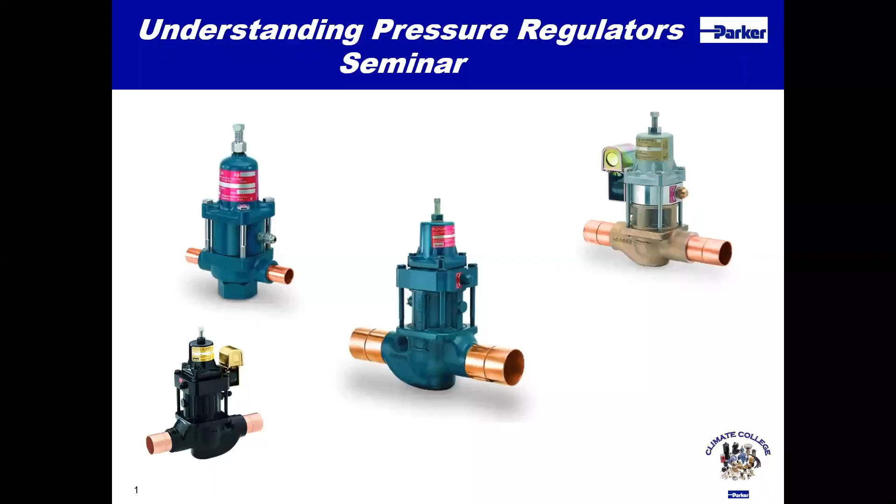Okay, alright, so just want to start off by thanking everybody for joining. My name is Eric McClure. I'm one of the regional sales managers for the Sporlan division of Parker. Just a little background about me.

Before I came on to Parker, I used to be a design engineer. I was designing chillers for several years out of college. Then about 4 years into that, I ended up joining the Sporlan division of Parker back in 2007 as a sales engineer. Then in 2010, I took over the Chicago sales office and did that for about 7 years. Then in 2017, I jumped over from the Sporlan division to the refrigerating specialties division and oversaw their sales force for both the Flo-Con and the industrial side of the business as well.

And then in the beginning of 2019, I believe it was, we decided to merge the Sporlan division and the RS division into one big division. Kind of kept the two separate still, and we still do — we still have two separate sales forces, two separate customer service departments, two separate plants as well. So what I oversee now is the industrial side of the business and the Flo-Con side of the business, and I also oversee the Sporlan traditional side of the business for the northern half of the US.

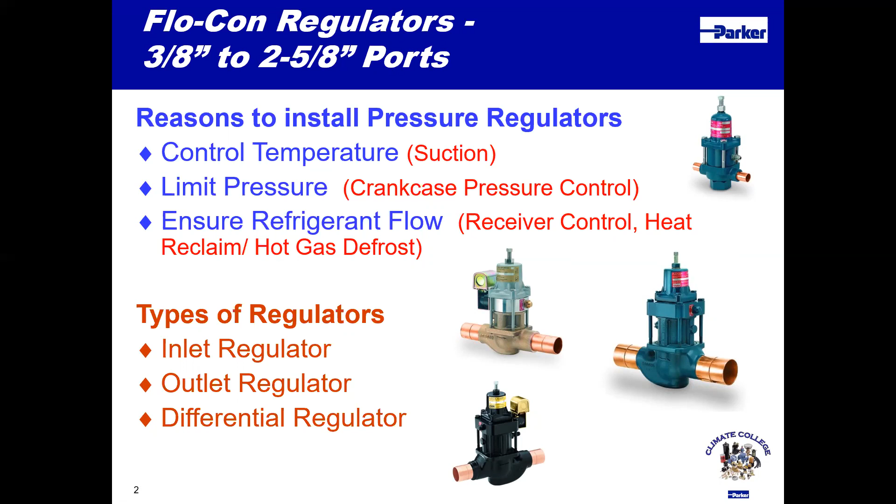So here are the typical applications covered by Flo-Con. You've got your crankcase pressure regulating valves. I'll go through the nomenclature in this presentation, as well as show you where it's at in the catalog. We basically use similar nomenclature to what Sporlan uses.

We use an O for an outlet pressure regulator, and an E for an external equalizer. Sport valves—the S in Sport stands for the solenoid shutoff valve, and ORT stands for open on rise of inlet. So it uses the same nomenclature as Sporlan. Sporlan has the SORD valves, the ORD valves, and the CROT valves—very similar to Flo-Con.

At one point the RS side competed against Sporlan until Parker bought Sporlan, and then we had two similar product lines. The Flo-Con product line has a lot larger capacities than the Sporlan product line, but we still maintain both product lines.

Going down the list here, you've got crankcase pressure regulating valves, which are your A8 series of valves, and they're outlet pressure regulating valves. You also have your discharge regulating valves, which are the differential valves—the D stands for differential, the O stands for outlet regulator. And then we also have our smaller series valves, which are the A9 valves.

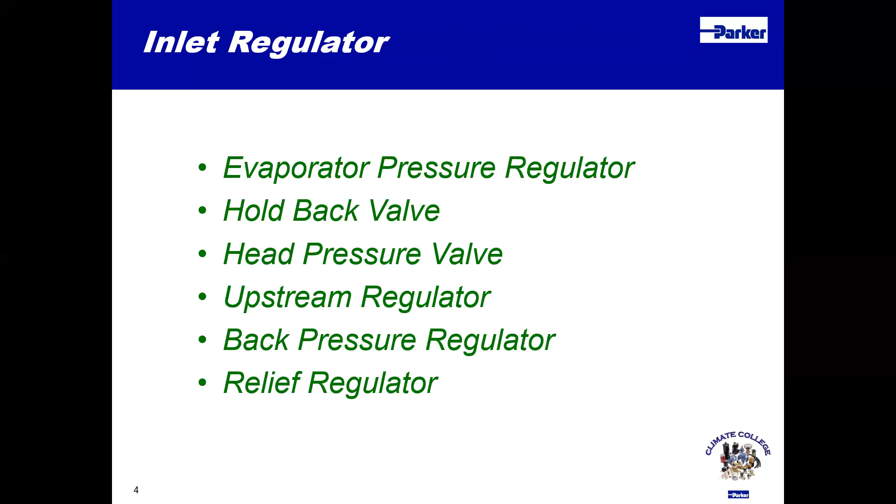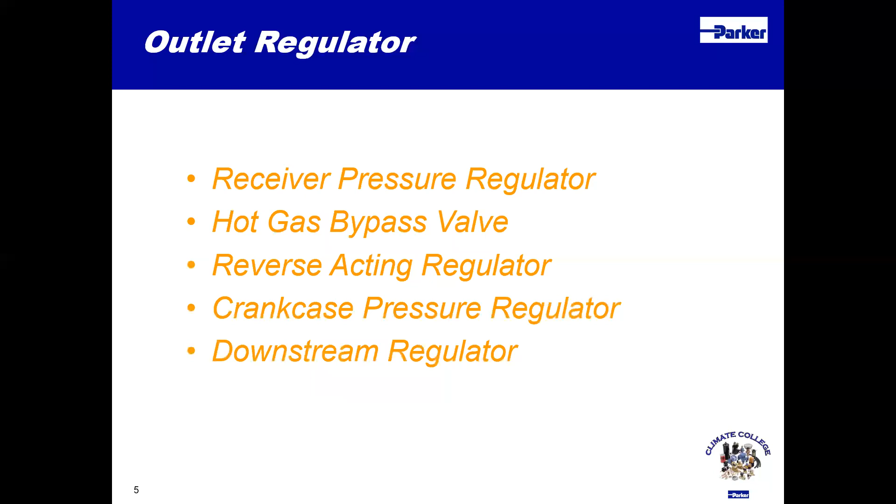Jumping over to the outlet side of valve types, you've got receiver pressurization regulators, hot gas bypass regulators, reverse acting regulators, crankcase pressure regulating valves, and downstream regulators. All these are just the same terminology for a valve that looks at downstream pressure and controls based on that.

Then you've got your differential regulators—your discharge regulator and your receiver pressurization regulator. They could be looking at the difference between your condenser inlet pressure and the pressure going into the receiver and controlling based on that, kind of like the ORD valves from Sporlan. Those are differential regulators, or the LDR valves, also from Sporlan, which are differential regulating valves as well.

All right, so jumping into this, first we're going to go over the sport type valves.

So like I said, you've got the Sports and the Sport 2s, and the S in parentheses stands for whether or not the valve has a solenoid shutoff coil. They can shut the valve off whenever it's energized. So you can get the valves either with or without the suction shutoff feature.

Like I said before, the Sport 2 valves are aluminum bronze bodied valves. They are more corrosion resistant than the standard sport valves that have a painted body. These aluminum bronze Sport 2 valves have an aluminum bronze body and an aluminum bronze cartridge. It's also got a stainless steel piston and parabolic plug. The bonnet assembly is made of aluminum. Pretty much everything's corrosion resistant.

So that's the advantage, that's why a lot of people use these, and that's why we offer these for the sport valves - because they're in the suction line where there's a lot of condensation. So it prevents corrosion in the suction line valves.

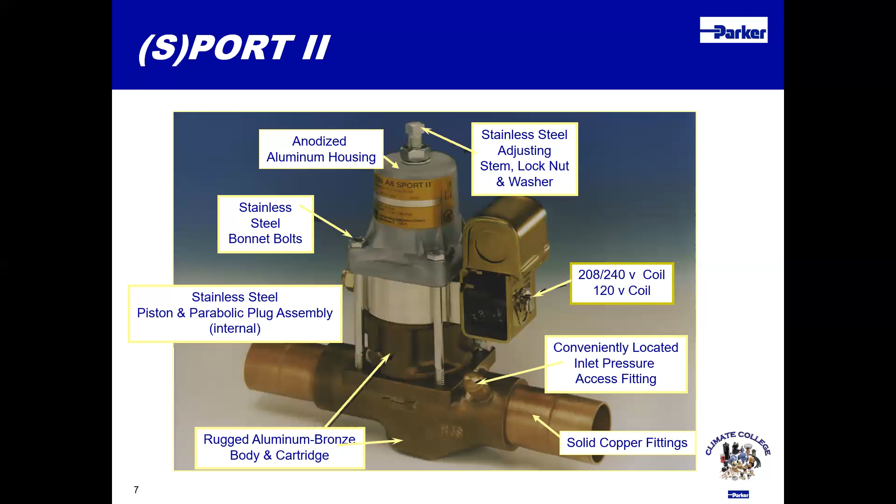So that's the Sport 2s, and then the sport valves are the ductile iron bodies. They're made of a ductile iron. The body and the cartridge are both made of ductile iron.

It's painted. One thing I do want to update you guys on: we're working on a project to bring in a new paint line into our Mauston, Wisconsin facility. We're looking at doing a higher end powder coat paint for all of our valves, not just Flo-Con valves, but also the RS industrial valves. One of the complaints we've heard in the past, rightfully so, is our paint, especially in suction line applications or in industrial applications on top of rooftops, doesn't hold up as well as plating the valves. So we offer plated valves on the industrial side, but we're also working on improving our paint line and bringing an entire new paint line into the Mauston facility. And the powder coat paint we're using is a similar type of powder coat paint that's used on compressors.

And so we've tested this powder coat paint well above 500-hour salt spray. So it actually competes and has exceeded the valves that are out there that are plated. So that's just an update on one of the things we're working on at Mauston - upgrading our paint line. But back to the presentation.

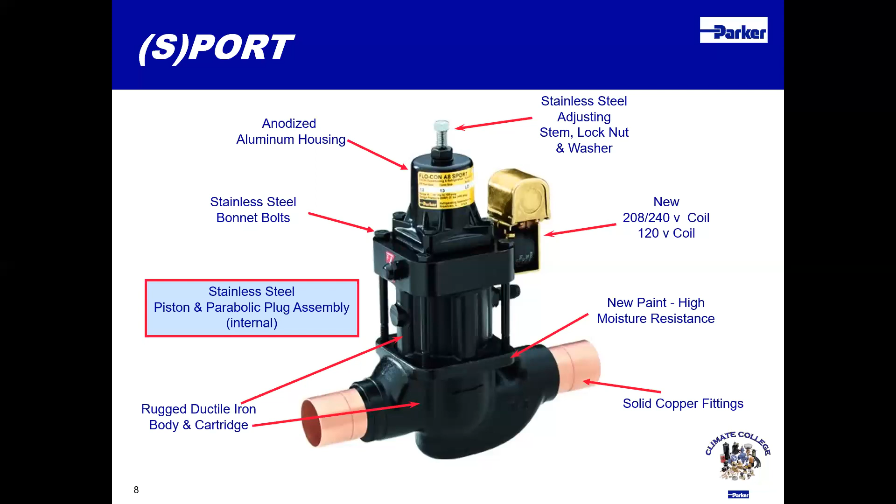And here's kind of what shows it right here, actually. So the Sport 2 is 3/8 up through 1 3/8 port size, and the sport valves are 3/8 through 2 5/8 port. So there's 4 main components. You guys are all familiar with the Q valves and the BQ valves from Sporlan, where you can mix and match and build your own valves. So you've got your body, your capacity cartridge, and your power element.

So on the sport valves, they're very similar. We've actually toyed around with the idea in the past of building a Flo-Con bench, if you will, where people could stock the bodies, the capacity cartridges, the adapter assemblies, and bonnet kits, and kind of build up their own valves. I know some wholesalers do stock all the different components and they'll mix and match - they'll take a capacity cartridge off of one valve and put it on another valve in order to make the valve that the customer needs. That's what they do now. But it's a very interchangeable valve.

You've got 4 different components. You've got the body, and on the sport valves there's 2 different size bodies. On the A8 valves, there's 3 different body sizes. And that's where you have your inlet connection and your outlet connection.

And based on the port size, that's where you get into the different body sizes. And then the capacity cartridge, you're able to swap those things in and out. So say you got a Sport 2 5/8 valve on the shelf, and the customer comes in and needs a 7/8. You could always take a 7/8 capacity cartridge and swap it out with the 5/8 that's on the valve now, and make that 5/8 port size valve into a 7/8 port size valve.

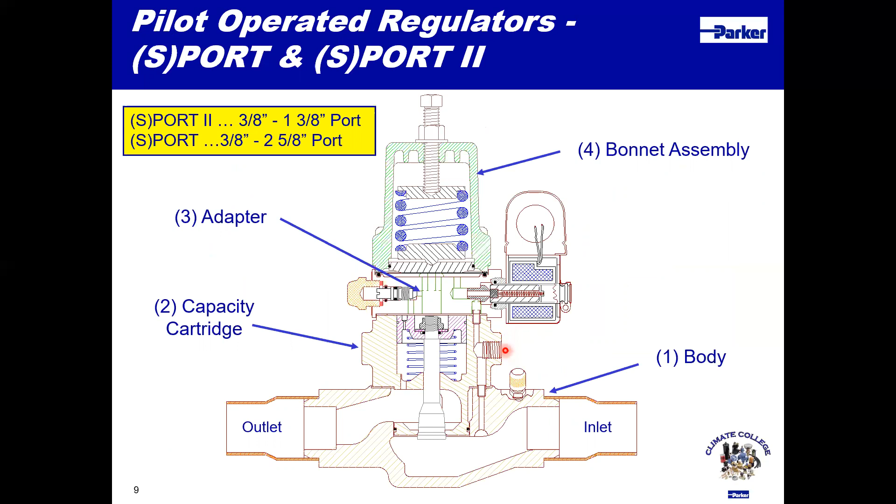Let me jump back here. It used to be right here. What was happening was contractors were burning their hands on the coil when they tried to connect to the valve. So I don't know how many years ago we moved it, but we moved it down to here. So you might come across an old valve out in the field that has the access fitting up here, but it's since been moved down here.

So that's the first component. The second component is the capacity cartridge. Like I said, it determines the capacity of the valve. It can either come in aluminum bronze or ductile iron body, depending if it's a SPORT or a SPORT II.

You'll start seeing all the gaskets involved in this valve. You've got a gasket on the bottom side of the capacity cartridge, and a gasket on the top side of the capacity cartridge as well. The alignment pin would slip into this passageway right here from the body, and then there's another alignment pin up here that aligns with the adapter assembly.

This is what we call the parabolic plug. It's stainless steel, and this whole piston moves up and down based on the flow going through the valve. As this piston moves downward, it opens up the passageway and refrigerant flows up through the port around the parabolic plug to the outlet. So that's kind of how the valve controls.

There's a slide later on that touches on it, but there's a lock nut right here that you need to make sure of. There's directions in some of our literature on how to set this valve, but if you over-tighten the lock nut, the piston doesn't move as freely as it should.

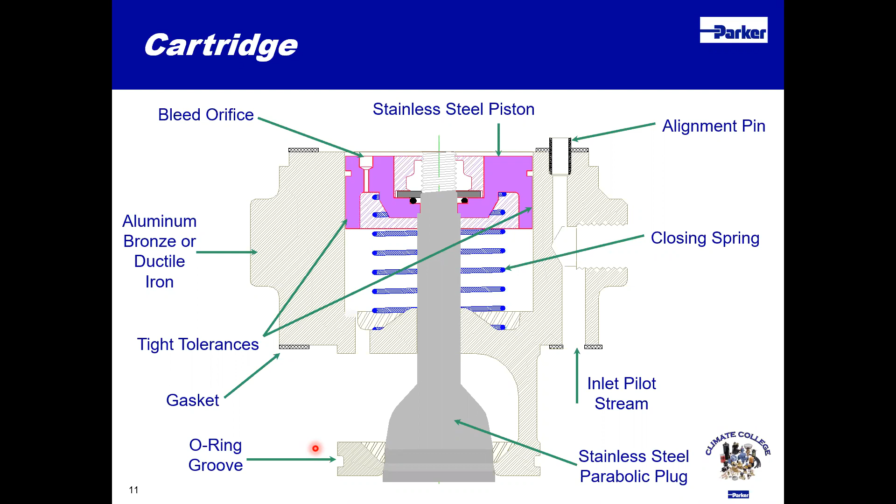One of the things, I don't know if this would be beneficial, Jeff, I don't know if I've already sent this to you, but I created, maybe 2 years ago, a file and I can update it as well. I ran a report for all of our rack OEMs, what they've purchased as far as Flo-Con valves over the past 3 years, I think it was. And I basically ranked them based on most quantity down to least quantity so that you're able to take a look at that and see what the OEMs are using most, and base purchases off of that.

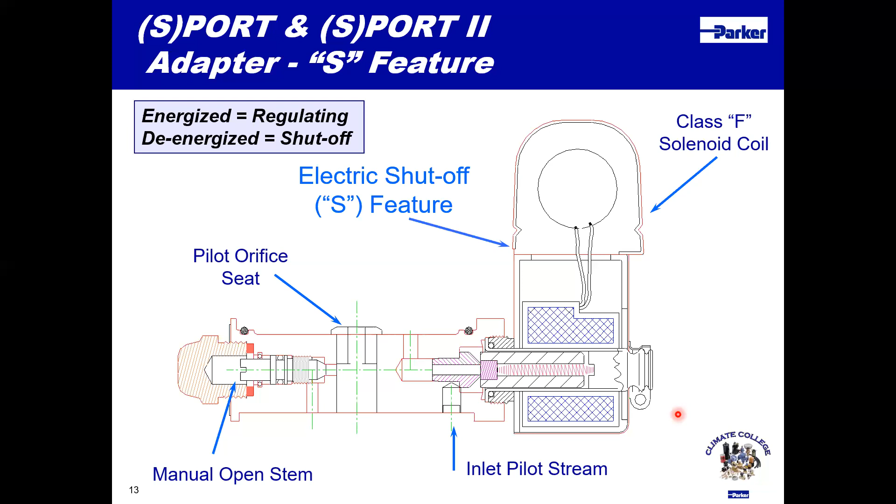No, we don't have it, and yes, I can forward that on to purchasing. That would be a help. Okay, yeah, I was thinking about that because you don't see too many port valves being used in applications. For the most part, we sell a sport valve variation.

So in order to go into wide open mode, you'd have to have both coils energized. Again, that's typically used if you have a dual temperature case. You're controlling one temperature to say 20 degrees Fahrenheit, and then, say around Thanksgiving, you want to convert that case to a turkey freezer. You then energize the bypass coil, pull the system down to rack pressure, and then run at a lower temperature.

Here's another breakdown of the operation of those two coils. On the shutoff coil, if you're energized, you're regulating the flow of refrigerant. If you're de-energized, you have the valve completely shut off and it's not regulating refrigerant. And then on the bypass feature, if your coil is energized, you're wide open. And if your coil is de-energized, you're in the regulating feature.

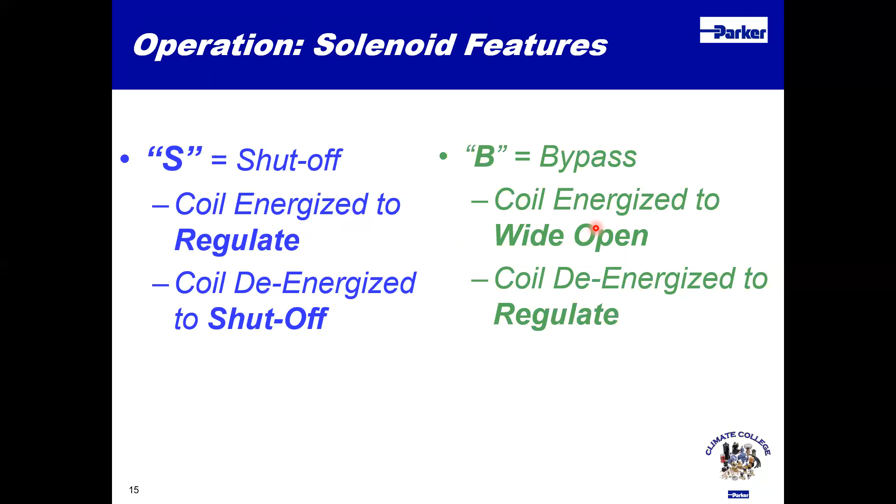The final part of the 4 parts that go into any sport valve or A8 valve is the bonnet assembly, and this is basically where you adjust the setting of the valve. On the sport valves, because they're on the low side of the system, you only have 1 spring inside of this bonnet assembly. Whereas on the A8 valves for the high side of the system, you'll see 2 springs in here because it's controlling a higher pressure.

The bonnet assembly is made of aluminum. It's got a stainless steel adjusting stem, a lock nut, and there's an O-ring seal right here. The diaphragm that sits on top of the adapter assembly is right here in red. And then you've got what I call a pin carrier, but really it's the bottom part, your spring carrier, with your O-ring seal around here. In this application, no refrigerant should be up in this bonnet assembly, whereas when I show you the differential valves, they'll have refrigerant up in this bonnet assembly. So this O-ring seals any refrigerant off from getting up into here.

Obviously as you adjust this adjustment stem downward, you increase the pressure. And in our catalog, it does show, for how many turns, how much pressure differential, how much pressure change you get based on each turn.

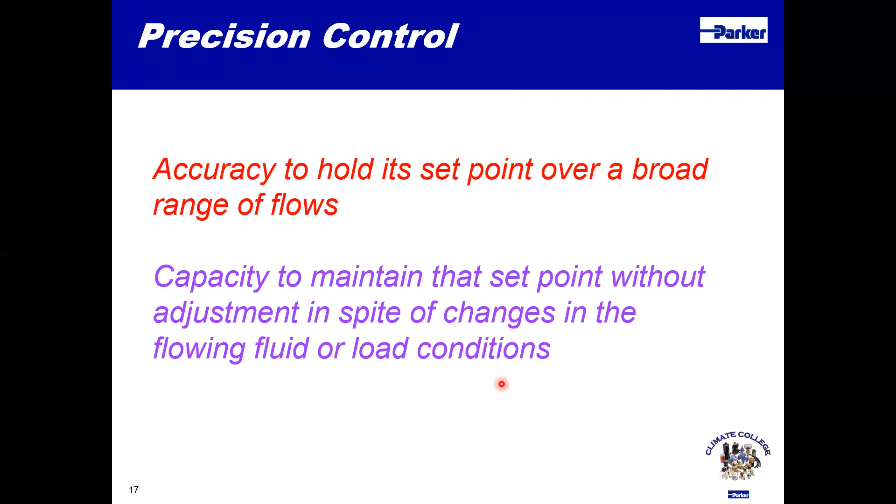Yeah, so basically that's the sport valves. And like I said, you use the adapter assemblies, using the adjustment stem on top of the bonnet assembly, to change the pressure setting of the valve.

And then this just goes into some information as far as different types of pistons and the parabolic plugs, just all the features of the sport valve and why it's able to control such precise pressures on the suction line.

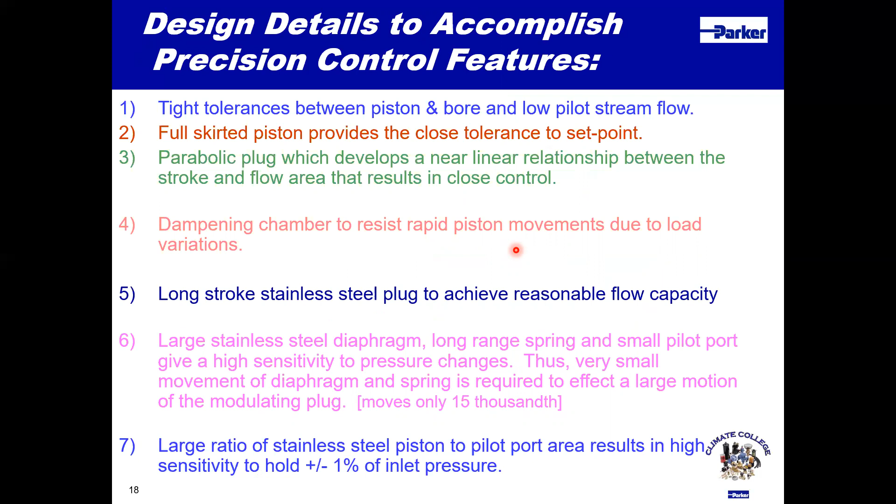We're actually looking to move our CO2 lab to Broadview as well. We're going to pretty much make the Broadview facility the natural refrigerants location. Then down at Sporlan headquarters, that's where we do all of our testing on the other refrigerants, the HFCs. So we've done a lot of testing on the Flo-Con valves down at Sporlan headquarters too. And up in Wisconsin, in Mauston, is where our production facility is at. Mauston's about an hour and a half north of Madison, Wisconsin, and about 2.5 hours outside of Milwaukee. We'll have to get you guys down to the facility at some point in the future once we're allowed to travel again.

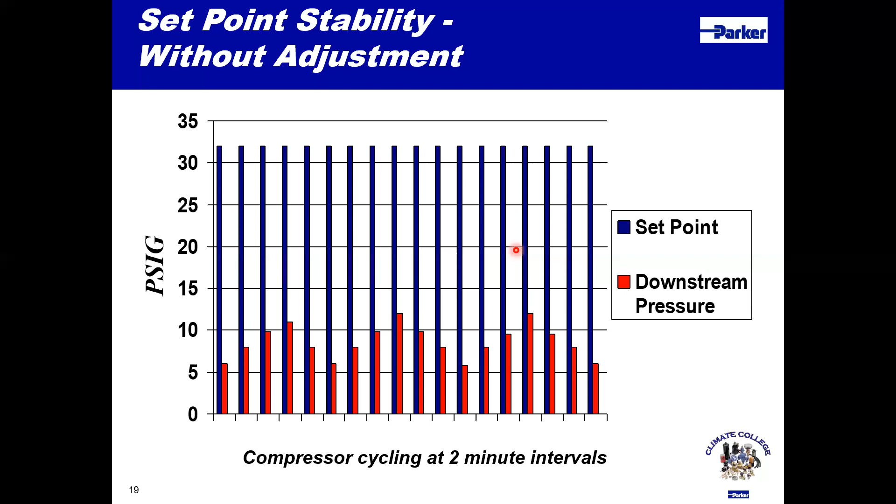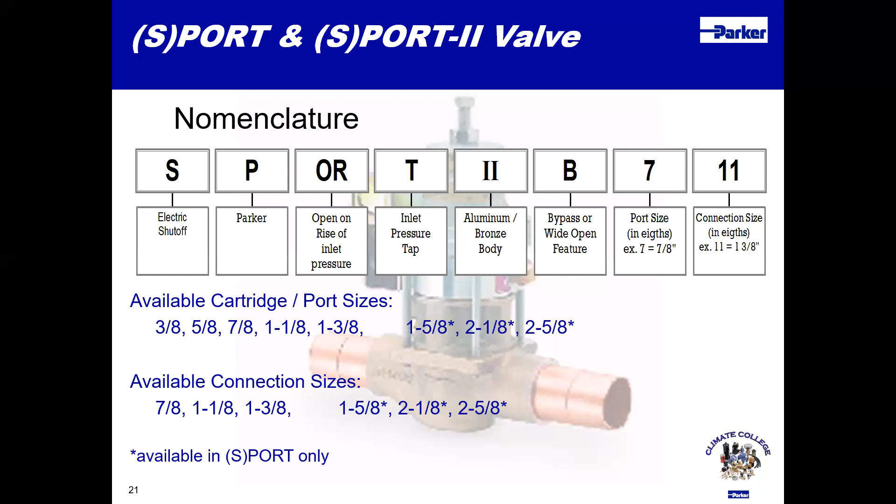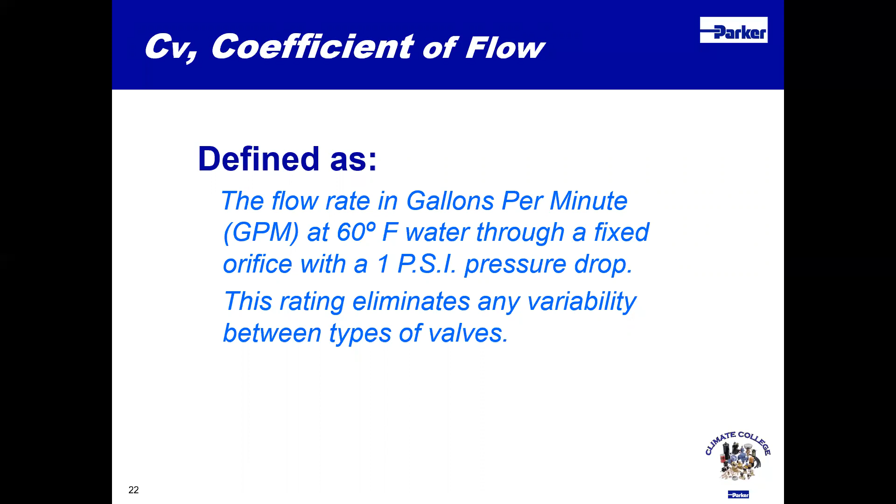Let's go to the next slide. So CVs, I don't have the CVs listed on this presentation, but I can send you the CV list of all the valves, not just Flo-Con, but also the RS side of the product line. We have a wide range of CVs for all these different valves. We actually have a table that shows the CVs of the sport valves and how they compare to Sporlan valves and CDS valves, so you can compare them to the Sporlan mechanical valves as well as the Sporlan electronic EPR valves.

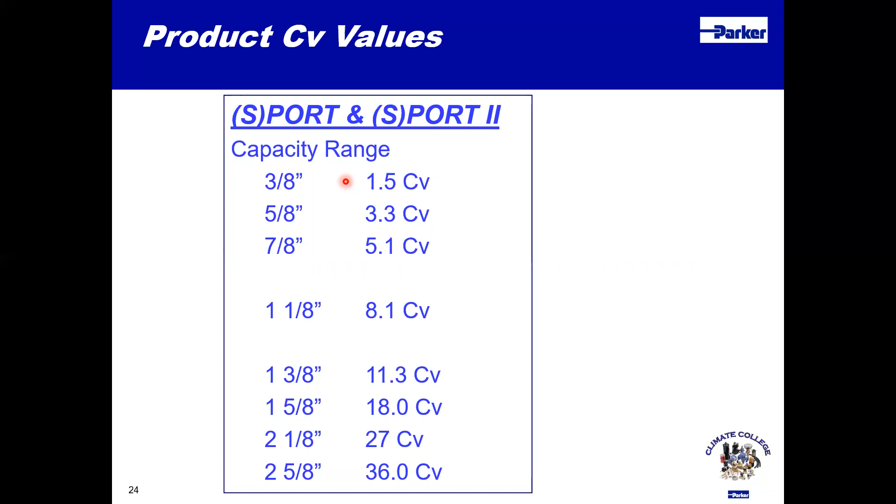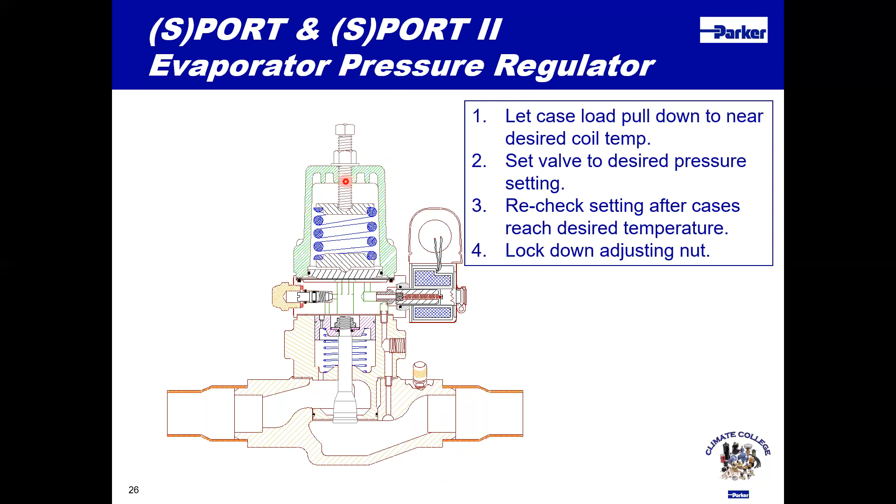As far as setting the valves, obviously let the caseload pull down to the desired coil temperature, and then set the valve to the desired pressure setting. I'll send you guys a list of how much pressure changes by each turn. It varies - the sport valves have a certain amount of pressure change per turn, and as you get to the high side valves, the change in pressure setting is a lot greater since there's two springs inside there. I can send that to you guys as well. Once you have the desired setting set, make sure you lock down the adjusting nut with the lock nut.

All right, so I went over the EPR valves. Any questions on the sports or the sport 2s? You guys are a quiet bunch.

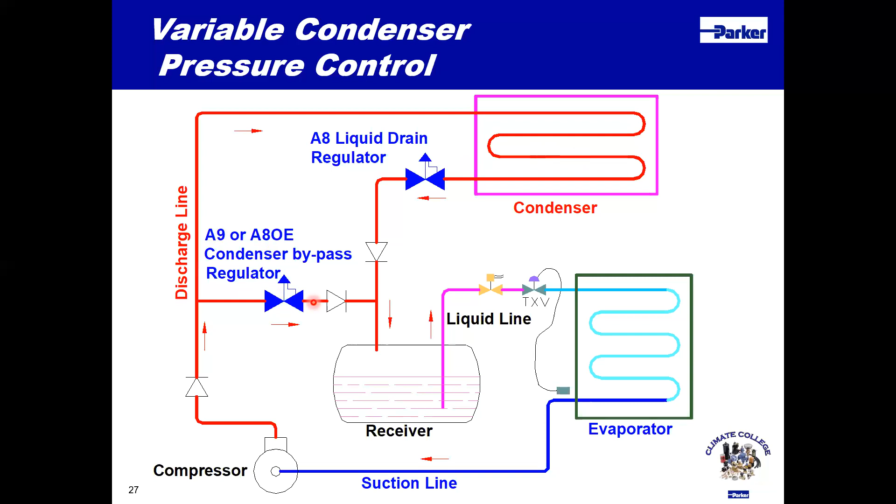So very similar to the sport valves, the sport valves are based off the A8 platform as well. Really, the only main differences are the A8 valves have 3 different body sizes instead of 2 for sports. The A8s are not offered in the aluminum bronze configuration because they're not in the suction line, so they don't sweat as much. And then also they have higher spring range than the sport valves do. But again, they're very similar - they consist of 4 different components: the body, the capacity cartridge, the adapter assembly, and the bonnet assembly.

Eric, if I may interject there, also for the hot gas bypass, the A8OE is used in floating head pressure because of the differential function as well, guys. Yep, and we're seeing more differential valves being sold over the years recently too.

Again, just setting the A8 inlet - so the A8 has 3 different body sizes, like I said, and I'll get into this in a second. There's the A8A, which is the smallest, the A8-1, which is the middle size valve, and the A8-2, which is the largest valve. So you always want to set your liquid holdback or your condenser holdback valve first, and then after that, make sure you set your condenser bypass or your receiver pressurization valve after you set your condenser holdback valve.

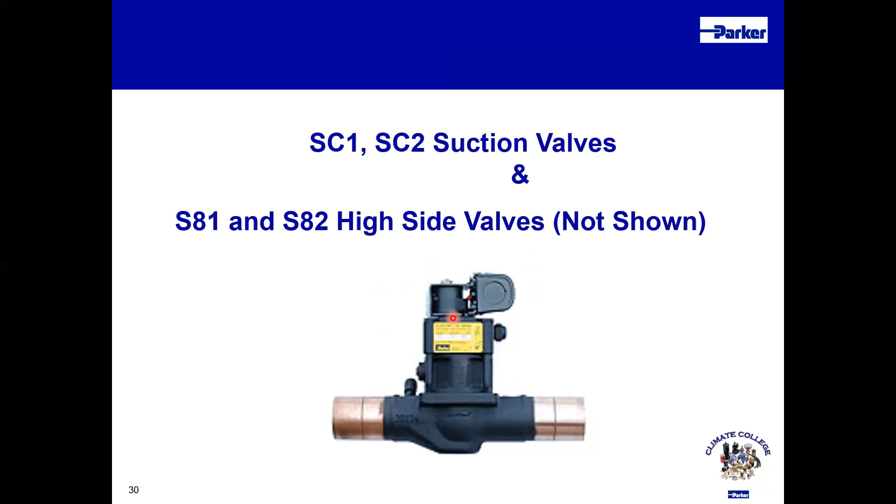Real quick, just going through the features of the SCs and the S8s. The SCs obviously are designed for the suction side applications. MOPD is 300 PSID. Because it's used for the suction side, it's offered in both ductile iron bodies and aluminum bronze, Class F coils, and then it's the same solenoid coil operator as all the Flo-Con products. And then the S8, the high side solenoid valve, is designed for high side applications. It's not available in aluminum bronze because it's used on high side, and it's available for the ductile iron bodies, and these come with the Class H coils rated for the higher temperatures.

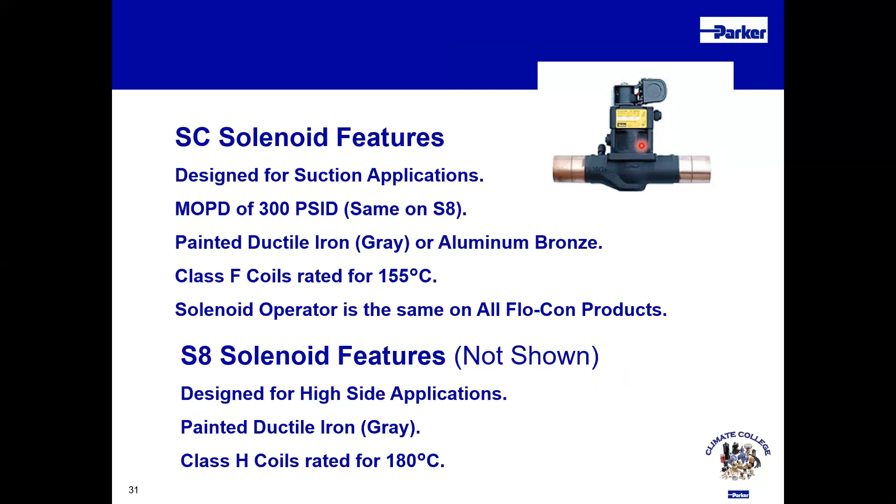Some Flo-Con do's and don'ts. Never use SC or S8 capacity cartridges in a sport valve. The capacity cartridges look similar, but they aren't exactly the same, so make sure you don't treat them as interchangeable.

Again, never use sport coils on the A8 discharge valves, or Class F coils on the high side valves. Never use a sport valve, which is your EPR valve, for high side control. It's not rated for it.

The pressure range of a sport valve is 0 to 120 pounds, whereas the high side goes up to 400 pounds of control. So never use a sport valve on the high side of the system.

And then never use an O-ring on the diaphragm follower of an A8L, which I'll show you why. On the A8Ls, that's where the refrigerant bleeds up into the actual bonnet assembly of the valve, so you don't use an O-ring on that application.

Quickly on the A9s: we have the A8 valves that are outlet regulating valves. The A8 AOE valve is an outlet regulating valve, typically for hot gas applications or smaller systems for receiver pressurization. You don't need a big A8 valve for the bypass feature, so we offer the A9 outlet regulating hot gas valve. It's a smaller bodied valve that's only an outlet regulating valve, so it only has 3 components.

It has the body and the capacity cartridge. It does not have an adapter assembly because it only does one function - outlet regulating. Then you've got your bonnet assembly right here as well. It has a lot smaller capacity, so if you compare an A8A or A9 with the 7/8 port size, the A9 7/8 port size has less capacity than an A8 7/8 port size.

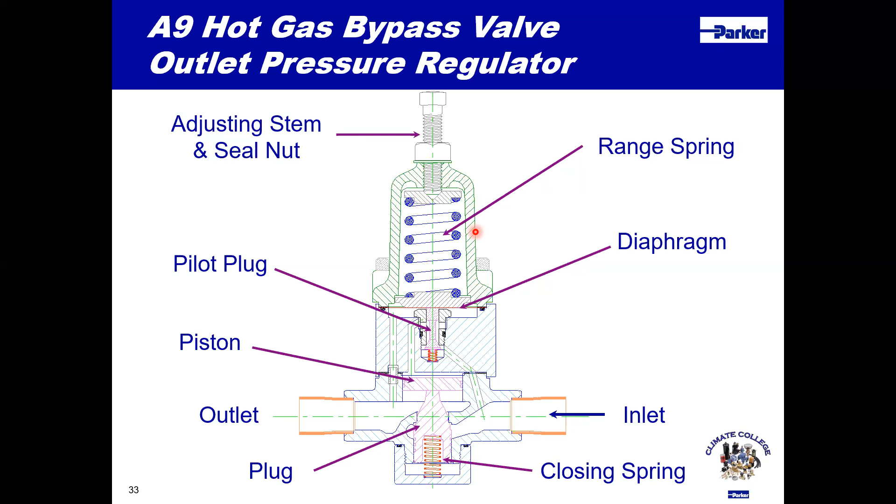Again, whenever you're doing high side head pressure controls, first you set the A8 condenser holdback valve that's in the liquid line, and after you do so, you set the A9 valve for receiver pressurization.

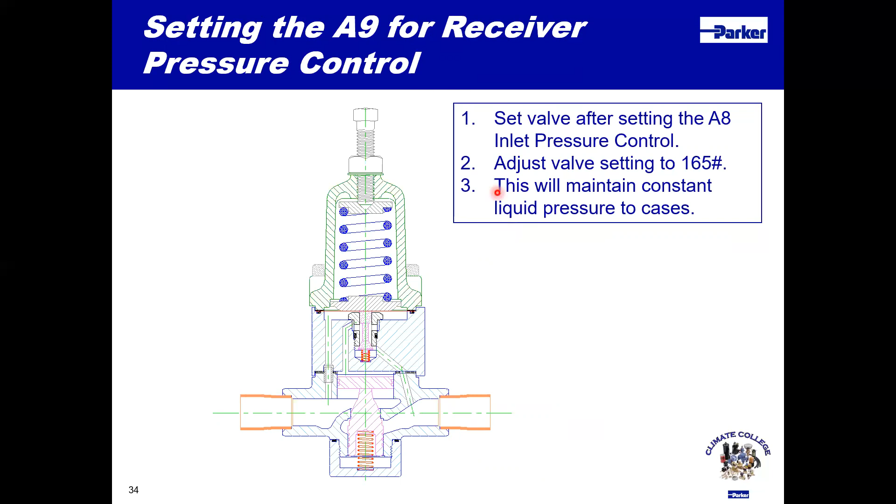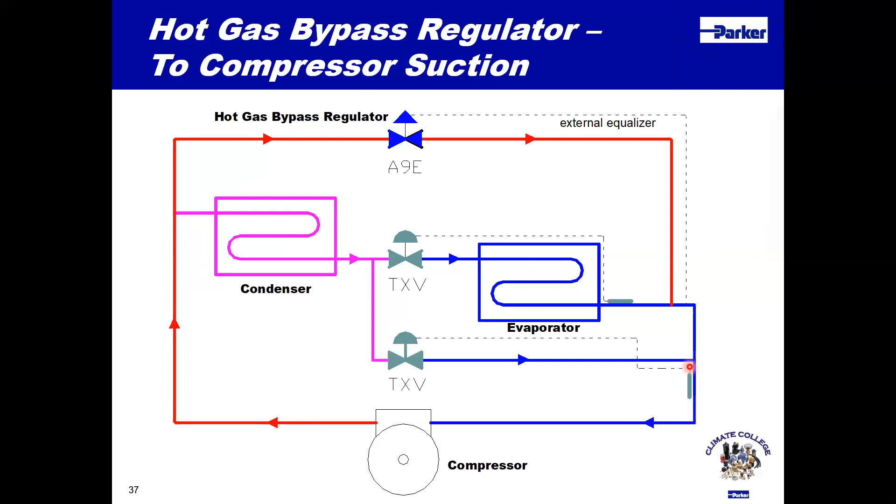The L stands for differential, and then the B stands for the bypass feature, so wide open feature.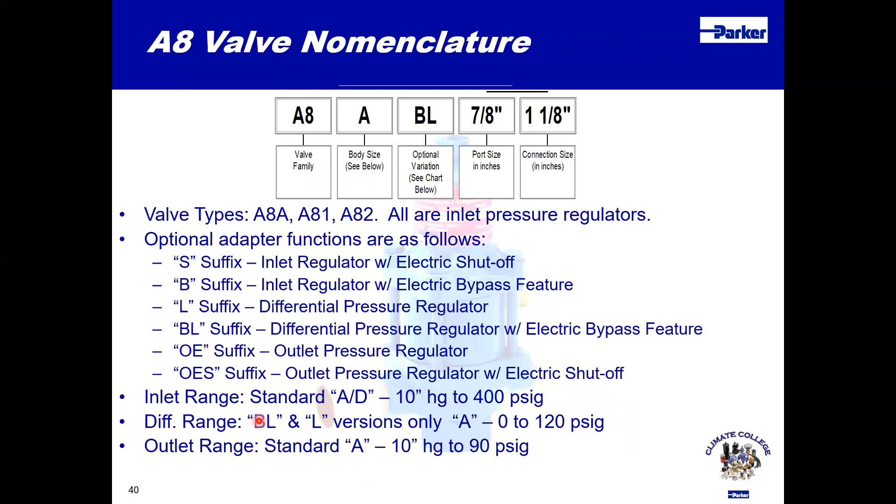If you remember, the sport valve only had one spring in here. Well, the A8 high side valve has 2 springs. So when you first adjust this thing down, the inner spring is actually stiffer than the outer spring. So when you first start adjusting down, you first engage the outer spring, and that outer spring is the same spring that's used in the sport valves. And so you have a 20 pound change per turn initially whenever you first engage that outer spring. And then once you engage the inner spring, skip back to this slide here.

So one turn is 20 pounds on those A8 valves until you get to 90 pounds. Once you get to 90 pounds, you then engage that inner spring and you go from one turn being 20 pounds to one turn being 70 pounds, and that applies from 90 pounds up to 400 pound adjustment. That's both for the A8 inlet regulating valves and the outlet regulating valves as well. Again, the differential valves use the same larger diameter spring that the sport valves use, which is the same outer spring as the A8 valves, so those have 20-pound adjustment per turn.

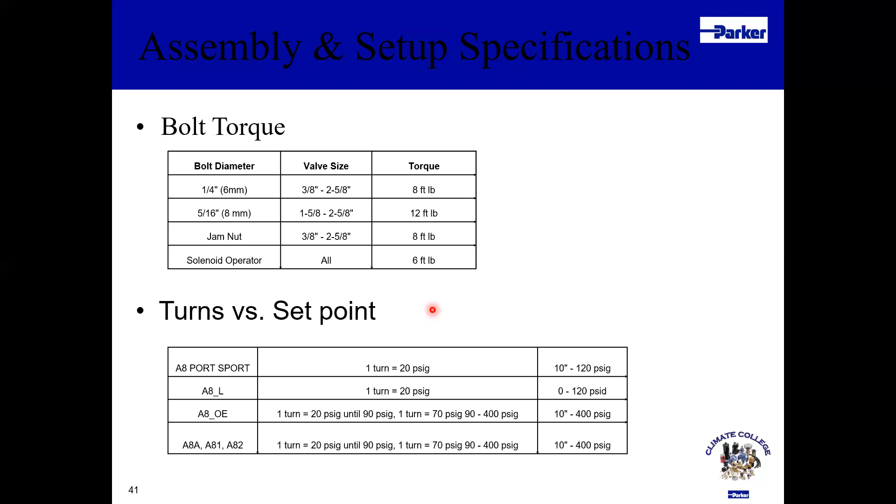Any questions on this slide at all? Nope.

Here's one thing. Typically whenever I used to do this training on the wholesale side in the Chicago area, we'd do some hands-on training, and we could even do this in the future as well. We would do hands-on training with contractors where at the end of the presentation we'd have 6 or 8 different sport valves or A8 valves, and we'd change things on them to make them not work properly, then put them in a jig and actually test them. One of the things is if you have the jam nut too tight, the parabolic plug and the plunger will not move up and down freely.

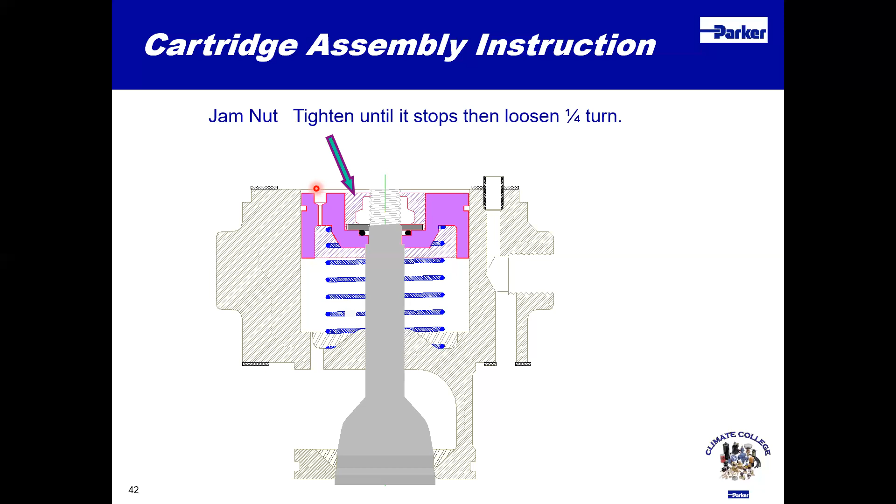So what you need to do with this jam nut on this parabolic plug on the cartridge assembly is tighten it until it stops and then back it off a quarter turn. So if you ever experience a valve that's sticking, that could be the cause of it - this is the jam nut being too tight. Let's see here, this is just a product - this is an old product bulletin update.

This probably you won't come across too much anymore. I think this came out maybe 10 years ago on the larger differential valves - the ones that utilize the A82 bodies, which is the 1 5/8 port, the 2 1/8 port, and the 2 5/8 port. Because of the side loading on the cartridge assemblies, back in the day we were seeing accelerated wear on the cartridge assembly. So we added, maybe 10 years ago or more, these wear rings to the cartridge assembly. If you come across an old valve in the field, you might see that the capacity cartridge does not have those wear rings, but since then we've added these wear rings to the valves.

So that was 2006, 2007, Eric. Okay, all right, you got a lot more history than I do on this product line. Like I said, I came over to the RS side, over to the dark side, in 2017.

Let's see here, this is just basically a supermarket drawing. We had these on the Sporlan side as well, showing the Sporlan valves. And then this is a supermarket drawing for the RS side, showing the port valves, the sport valves, the differential valves right here, high side regulating valves.

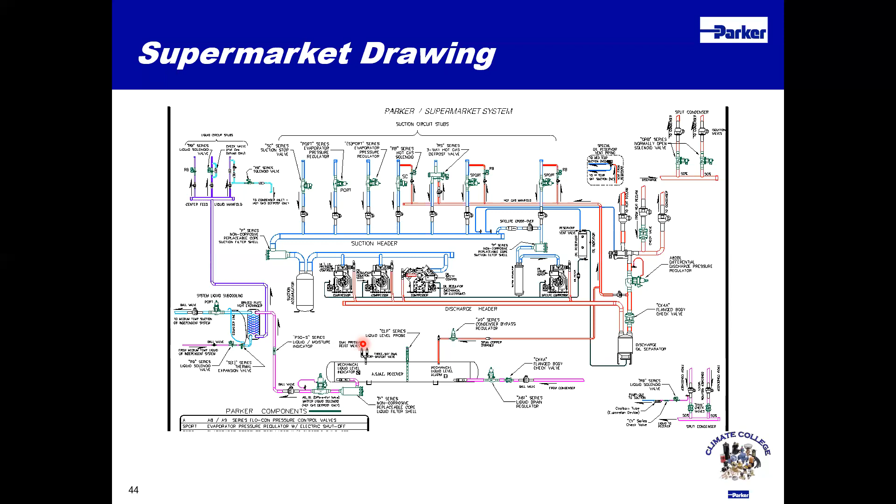Other than that, do you guys have any questions at all? That was most of the presentation. I do have a couple of slides.

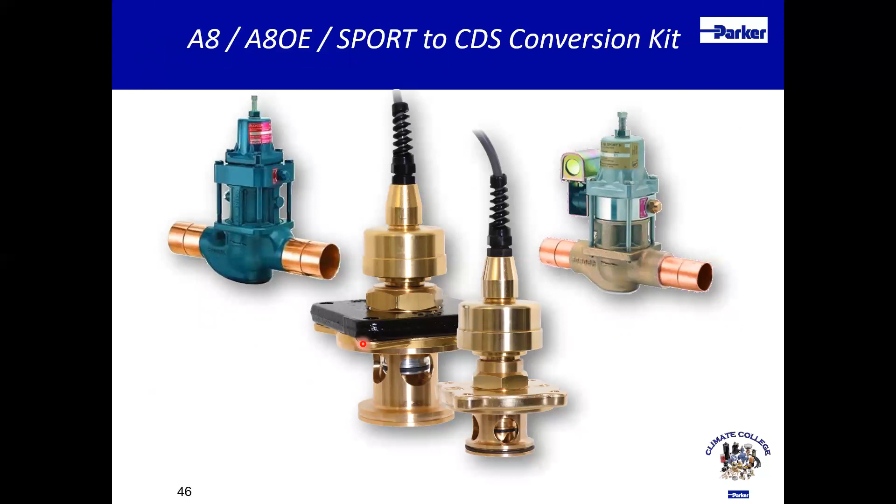I don't know if you are aware, we did launch - and honestly it probably wasn't as successful as we thought it would be - but we did launch the A8 to CDS conversion kits a number of years ago. We did this originally because Walmart had a bunch of Flowcon valves on their racks, and they were building all their new stores with CDS valves. So they wanted a way to convert all the old stores from the Flowcon valves to the CDS valves. So we created the sports to CDS conversion kit, which we sold a good number of them, but they weren't as widely successful as we thought they were.

And honestly, to be honest, we thought that once Sporlan came out with the CDS valves, we'd see a trailing off of Flowcon sales for suction line applications. But we've actually seen an increase recently on the OEM side over the last 5 or 7 years - we've actually seen an increase in business on the Flowcon side, surprisingly. So here's just a quick snapshot of the A8 to CDS conversion.

Basically, you pop off the bonnet, the adapter assembly, the cartridge assembly, and the CDS conversion kit just bolts right to the sport body. So it's very easily assembled. You've got the sport valves, the A8As, the A81s, and the A82s covered.

With that said, that's all I had as far as formal presentations. Any questions? I see there's two notes in the chat box.

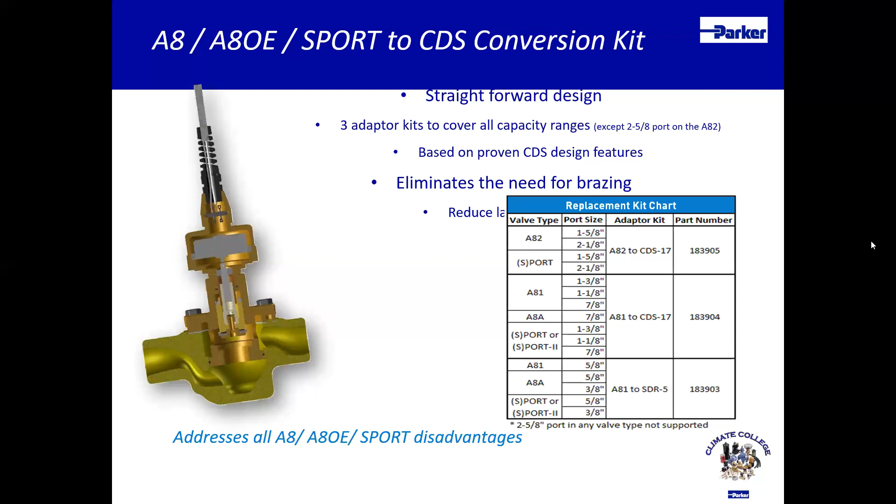All right, so let's open this up. So Jeff, you said you sent this out to everybody on the call already, these catalogs? Yes. Has anybody not received a copy of it? Please let me know via email. You should have this copy of the 611H as well as the PKR 03 catalog.

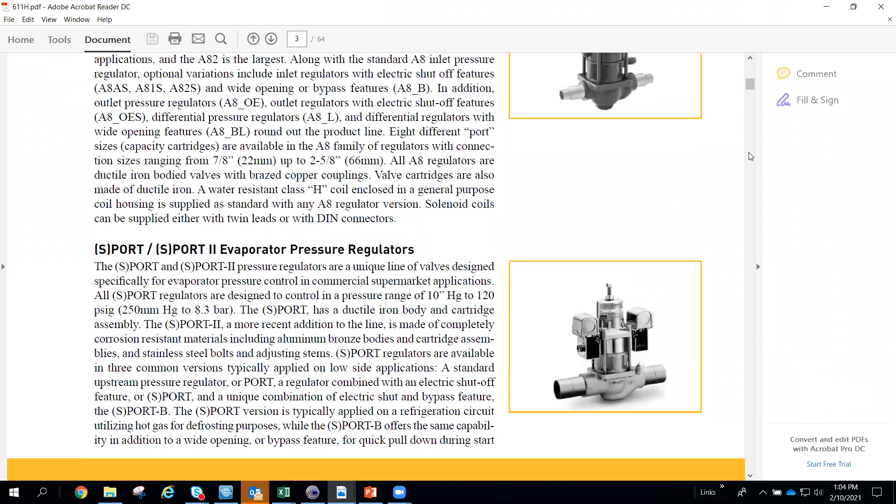So this catalog is solely geared towards the Flowcon product line. The first several pages just have descriptions of the different valves, different applications. It first gets into (S)PORT valves.

Again, this is where you can find all the different features and benefits, the specifications of the valves, the pressure ratings, temperature ratings, and then it goes into the actual nomenclature of the valve, which we already covered.

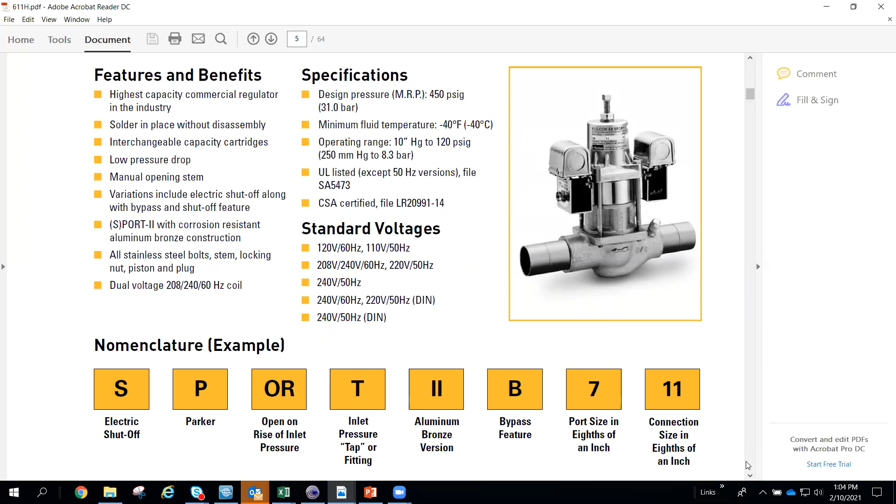Again, like I said, the difference between the A8s and the sports is the sports always list it not in fractions of an eighth of an inch. They just list the number of eighths of an inch. So 7/11, whereas if you look at the A8 valves, it'd be 7/8 inch and 1 3/8.

Here's all the different combinations of this. So on the smaller body size, like I said, there's two body sizes for sports. The smaller body size goes up to an inch and 3/8 port size. But you can mix and match all the connection sizes. So for instance, on all of these, you can actually go up to a 2 1/8 connection size with that body size. So even though you only have, say, an inch and an eighth port size, you have all of these different options as far as connection sizes.

And that's for the sports and the sport twos. And then the larger body size of sports, you can go up to 2 5/8 connection size and port size.

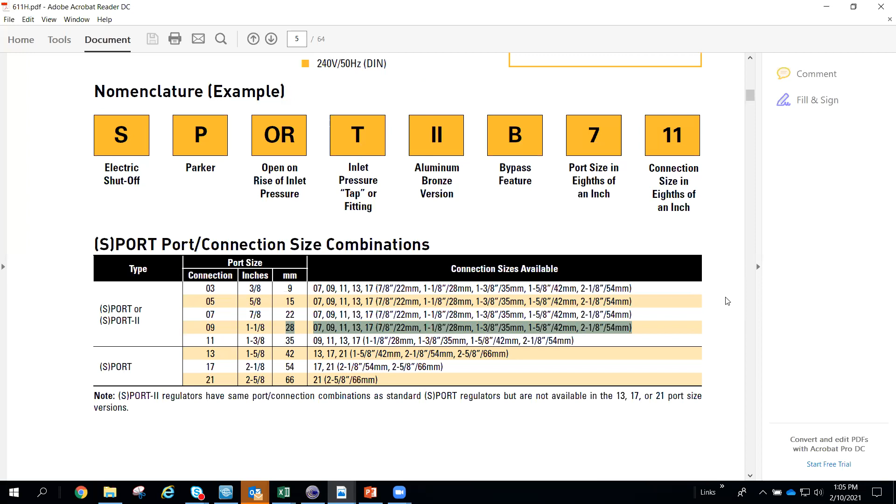So just running through this real quick, some technical information, and then you start getting into all the capacity tables. Like Jeff asked, when are we going to update this with the newer refrigerants? Like I said, that was one of my main votes to update this catalog, for our advertising department to focus on updating that. But you can access the other refrigerants through the different sizing programs.

Basically on the sport valve sizing, for the suction capacities, it breaks it down based on port size here in these columns. And then it breaks it down based on evap temperature that you're controlling and the pressure across the valves as well.

We typically say we'd like to see a 2-pound pressure drop across the valves. A lot of people will apply it at a 1-pound pressure drop across the valve. The only problem is whenever you oversize a sport valve or a SORIT valve, you'll sometimes get whistling. So in the supermarkets you'll hear whistling because that valve is just barely cracked off the seat. So in those cases, the valves could be oversized.

The other thing to note in a grocery store is the reason we show the 1, 3, 5, and 10-pound pressure drop is depending on the temperature of the case, you could see a house suction, which is your main suction back to the rack, that's easily 5 or 10 PSI below what a warmer case may be run at. If you take a look at the variance in capacity from your 1-pound through your 10-pound pressure drop, you can quite easily end up with that valve being oversized. And that whistling can create really annoying harmonics in the store that the end user gets upset about.

You guys can see this main screen, right? Yes. Okay, yeah, for some reason it's not... usually Zoom will have like a border around what you're showing. So I just want to make sure you guys can see my screen.

If you use the old Sporlan sizing program, it'll show you what we call the available pressure drop, which is basically the difference between what you're controlling your evaporator to and what your common suction is. It could be a 3, 5, 10, or 15-pound differential between your common suction and what you're controlling your evaporator to. So if you are controlling a medium temp case off of a low temp rack, you could get by with a smaller valve that has a higher pressure drop.

If you're using the virtual engineer for sizing a valve, it's going to ask you for 2 values that have to do with your suction. One is your evaporator temperature, and the second is your suction temperature. So you will need to know those 2 values, plus the superheat back to the compressor, for sizing an EPR properly, whether it be a Sporlan or a Flowcon. It asks for those pieces of information.

Bob just asked, can you still get the old Sporlan sizing program? It's not available online anymore. Mike, you probably have some old CD-ROMs sitting around. I think I have the executable file that I've sent to people in the past for them to load on their computers. I've sent flash drives before with the old program. There's no formal location that it's available to the general public anymore, but correct. And it hasn't been updated either, so it's lacking in new product. But that's the only option, if you've got one, keep it somehow.

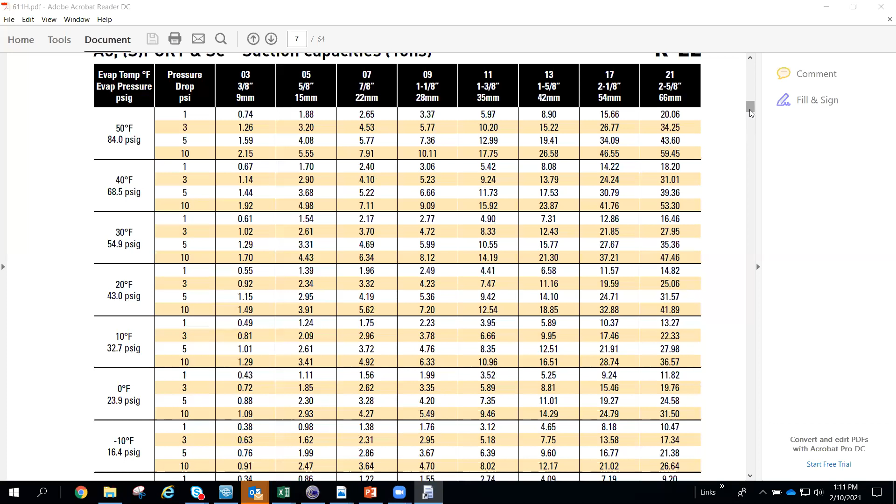So, I'm just going down this again. Suction capacities, just different refrigerants and kilowatts and tons.

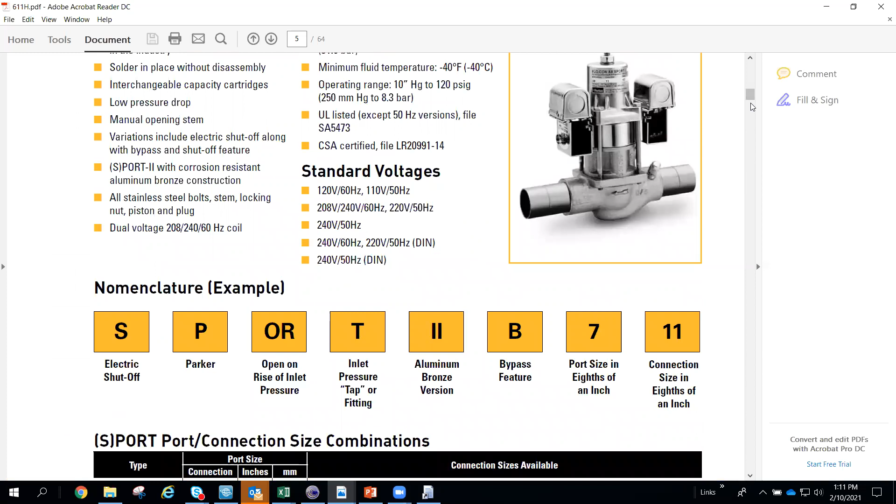Kind of skip over. Eric, just a question on sizing for EPRs. Oversizing can lead to control difficulties, correct? Like modulation problems? Oh yeah, absolutely. I mean, you're trying to control very little flow with a huge port. So sizing, they're not that forgivable if it's oversized or undersized in that sense.

Yep, and that's why we recommend a 2 pound pressure drop across the valve, but a lot of people apply it at a 1 pound pressure drop. But once you get below that, you're going to definitely have control issues. Same with the SORIT-PI valves - because it's powered by high side hot gas, it's a little more forgivable, and those can be applied down to a 0.5 pound pressure drop. And then below that, that's why a lot of people like the CDS electronic EPR valves, because you can apply those down to a 0.1 pound pressure drop if you need to.

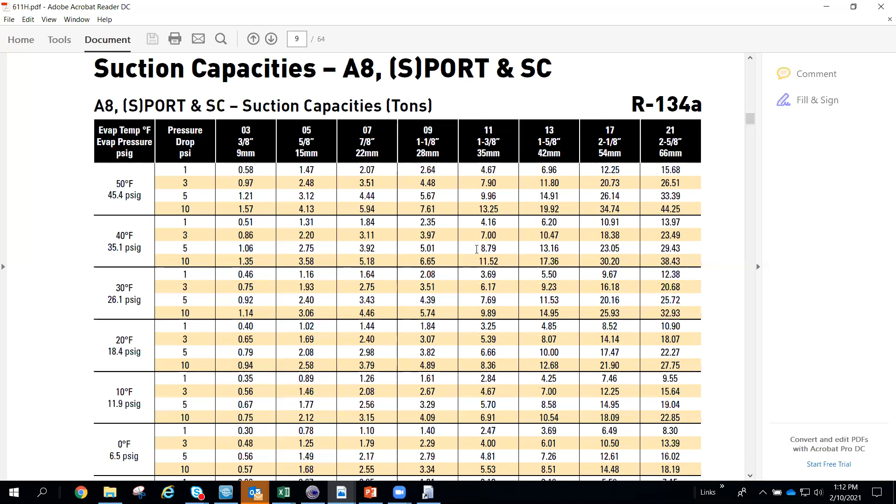Right. Eric, this is Glenn in Kelowna. I just question if you do have that turkey case scenario where you've got dual temperature cases or whatever, running medium temp, the selection is going to be that much more critical, I'd assume, as your pressure drop increases and the sizing of the valve capacity changes.

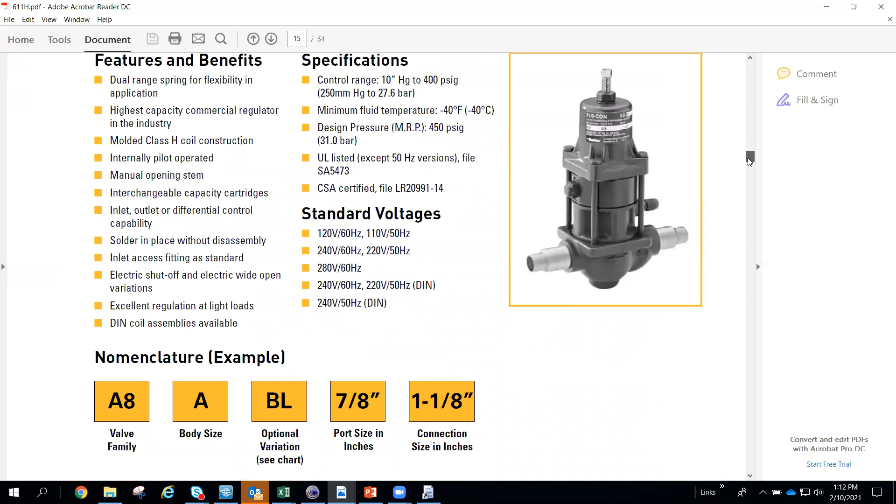Yep, and yeah, whenever you're sizing the valves for different applications, different scenarios, different conditions, you want to size it based on the 2 extremes. Not just EPR valves, but anytime you're sizing expansion valves - like Mike, I don't know if you've sent any of the information to them on what Jerry's put together as far as the AWEF condensing applications, where when they're floating high side pressures, you have to make sure you size all of your valves, whether it's expansion valves or EPR valves, based on the worst extreme cases, so that valve covers all those applications.

Actually, Eric, we've had extensive conversations on this subject internally to do with the AWEF issues. Yes. And Mike, has Jerry sent that formally out to all the distributors? We've shared it, Mackenzie shared it with Jeff. Okay, good, both of them exist. Yeah, but again, like Jeff alluded to, I'll expand on it in case you all haven't seen it.

It's more of a quick pick table. What your practice is now basically adopts what Eric said - you check it at the high, you check it at the low, and you're going to get the valves that you require. This quick pick table, if you've got limited information, will provide you with a workable selection for an expansion valve to comply with the AWEF requirements. If anybody's looking for that, you can contact me and I'll get it out to you. It is posted online as well on sporlan.com. Actually, all sales got that about a month ago when Mackenzie gave it to me. Great, thank you.

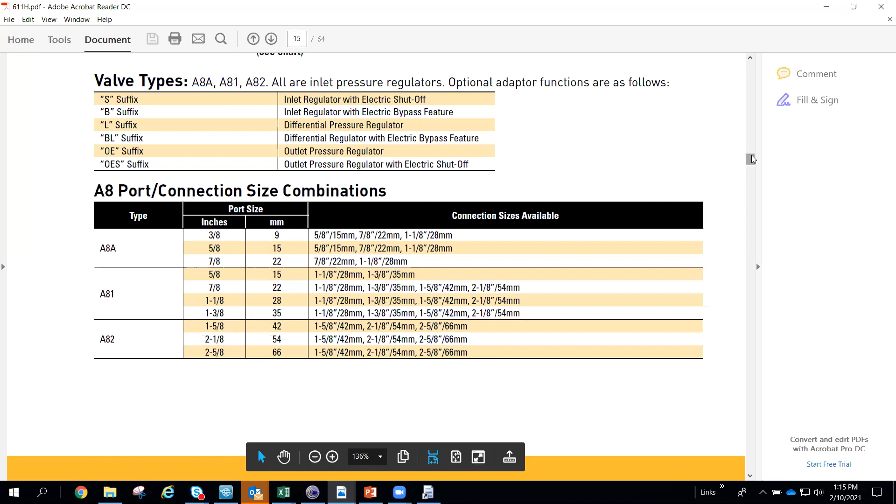Just a lot of technical information. If you guys are bored and want to fall asleep easily at night, feel free to read through this stuff.

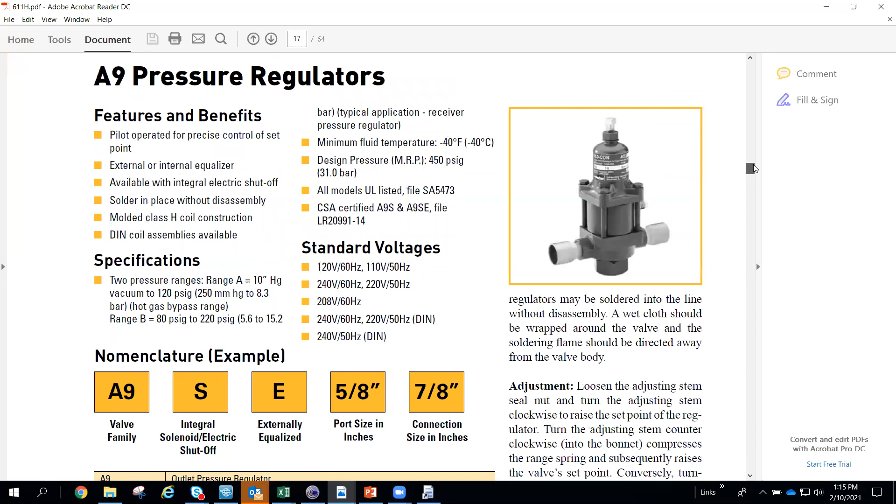Here's the A9 product range. Again, it goes through the features and benefits, the specs, the nomenclature, the port size applications. Like I said, the port sizes of the A9s versus the A8s - don't think an A9 7/8 is the same thing as an A8 7/8. The capacities are a lot smaller on the A9 valves. So if you're in a pinch and replacing an A8 7/8 and you don't have an A8 7/8, do not just automatically think the A9 7/8 will replace it. It's a lot smaller, so make sure you resize if you're using an A9.

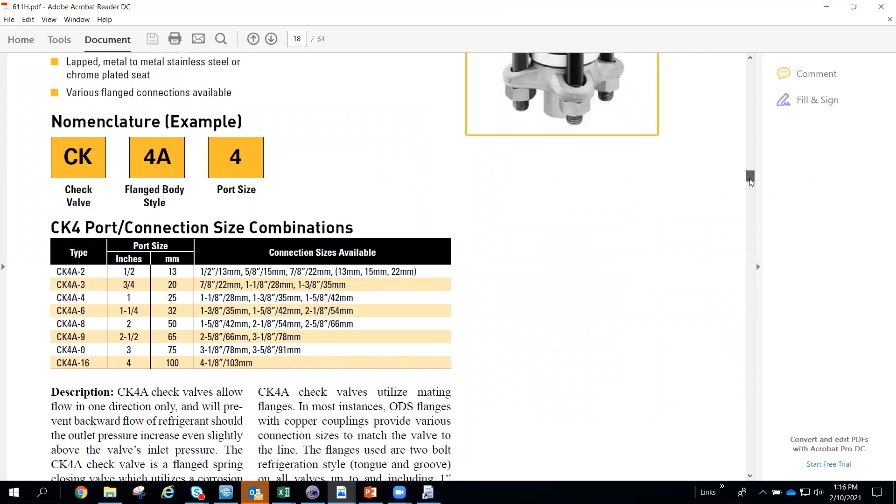It's got the CK4 check valves here. Just features and benefits of the CK4As in here. Capacities of these check valves as well. Just flying through here real quick.

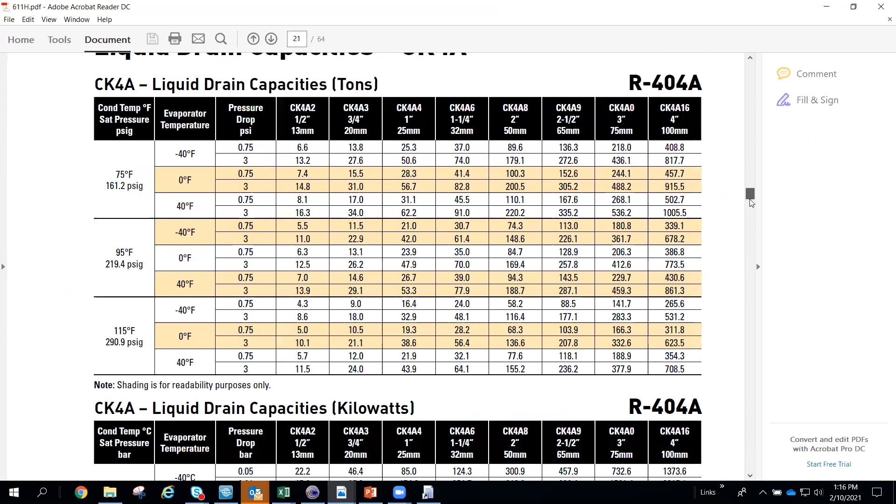So I already showed you the suction capacities for the sport valves. Here's where you start getting into the liquid capacities of the A8 valve. So liquid meaning you're using this as a condenser holdback valve in the liquid line. That's why you see the capacities jump up so much. These are the same size ports as the sport valves, but because it's used in liquid capacity applications, it's a lot higher capacity. Again, just different refrigerants and different tons and kilowatts.

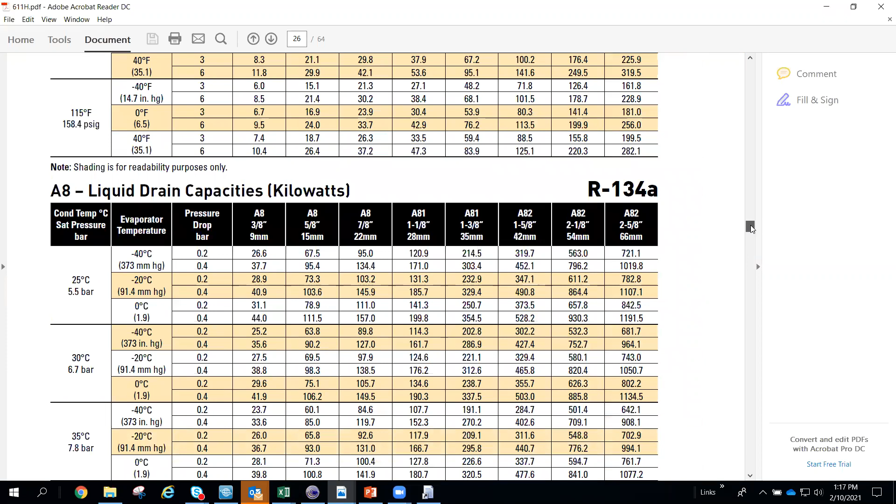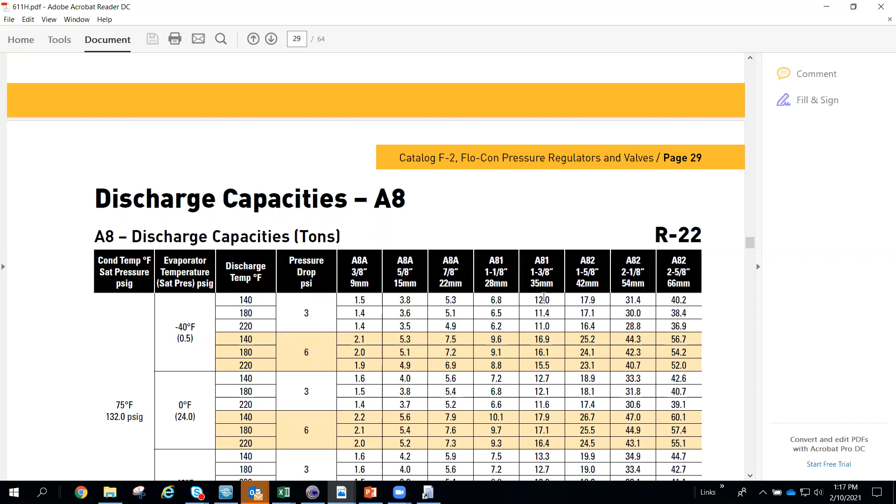See, stop me if you have any questions on any of this. Here's the discharge capacities. So you've got suction, liquid, and discharge capacities for all the A8 valves across the different refrigerants. And again, these are all at different pressure ratings as well - you've got 3 pounds and 6 pounds listed. So obviously the sizing program will dive into more detail between these two, but you can extrapolate or interpolate if you need capacities between these two or outside of these pressure ranges.

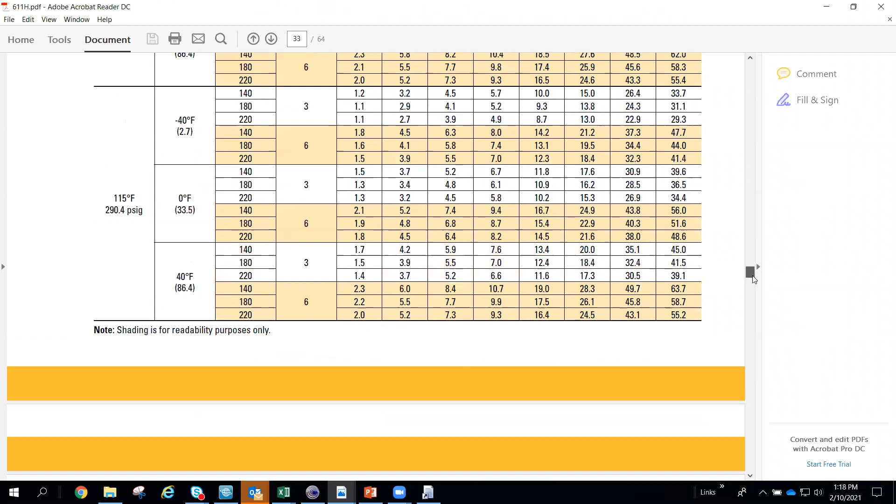Most commonly, you'll see these tables being used for the 82BL selections. Sorry, just skipping through this real quick, trying to see if there's anything else I wanted to show you other than the capacity tables.

Just while you're doing that, for the defrost differential valves, one of the things to always verify with the contractor is the location of the valve, because depending on how you're sizing it, you may need to use the liquid tables or the discharge tables. So again, matching the valve part number up is a direct replacement. But if you were trying to do a conversion from an old Sporlan valve or some other manufacturer's regulator, knowing where that regulator is installed is a key question.

Yeah, and the two styles that Mike is alluding to are: you've got a holdback valve in your discharge main that is holding back pressure so that the hot gas defrost has enough gas being pushed out to the case or evaporator. And then you may have a liquid line differential valve that allows the condensate produced through defrost to be pushed back into the liquid line. So there are two very different cases for that selection.

Those cross over on the Sporlan side. It's the LDRs, the liquid differential regulators, and then the DDRs, the discharge differential regulators.

And then here I'm showing the condenser bypass capacities. This is where you're bypassing discharge refrigerant from the compressor around the condenser into the receiver to pressurize the receiver. So again, those are outlet regulating valves. You either use the A8 OE valves or the smaller A9 valves. So this shows condenser bypass capacities.

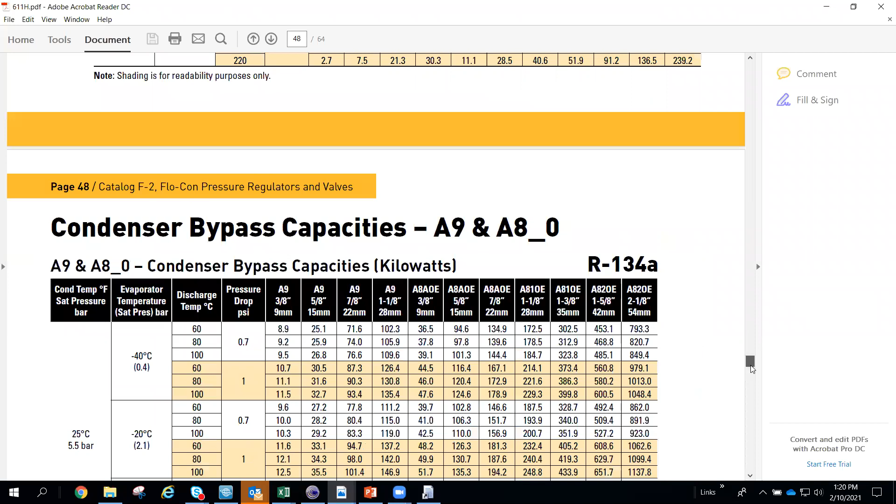Again, just all the different tables for all the refrigerants, both in tons and kilowatts. And then it gets into hot gas bypass.

So these outlet regulating valves can also be used in hot gas bypass applications, hot gas to the low side of the system. So again, you've got A8 OE outlet regulating valves and A9 valves that can both be used in this application. And you size based on condensing temperature, discharge temperature, and the capacity of how much you're trying to bypass.

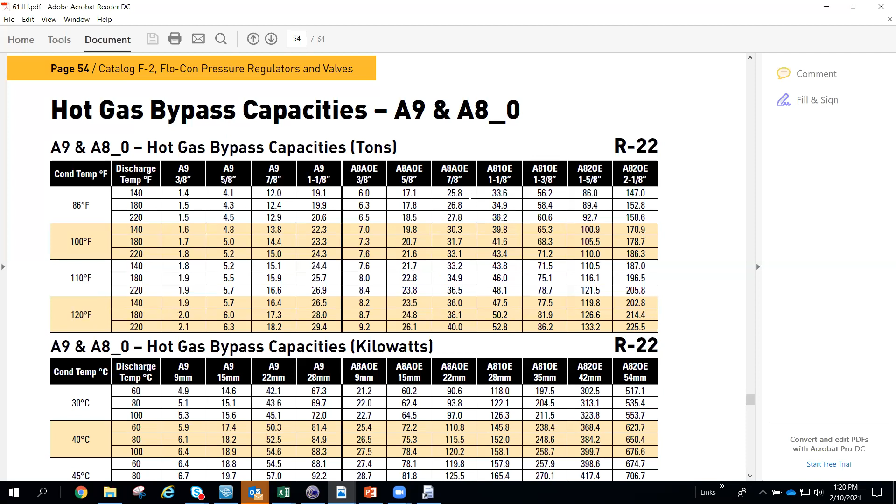And again, Eric, can you scroll back up just a little bit to show the diagrams as well? Oh, yeah, these are a great resource to send to a customer to try and differentiate what you're truly working with.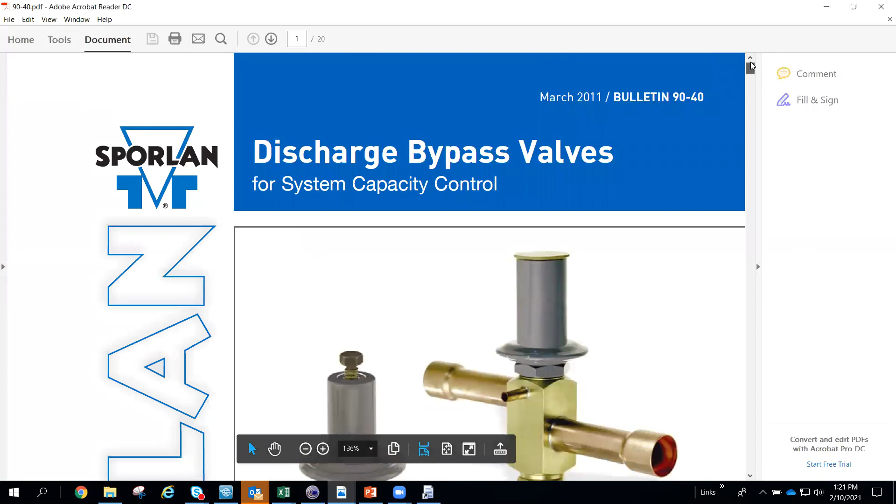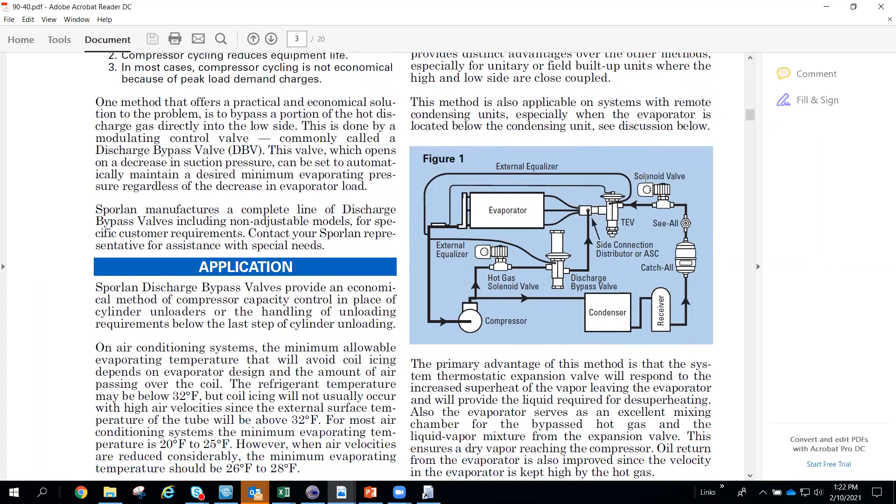In the Sporlan 90-40 bulletin, the RS bulletin showed you two applications for hot gas bypass. The first is going from your compressor discharge to the outlet of your expansion valve using an auxiliary side connector before your evaporator. The second is pulling hot gas off your compressor discharge and piping it into the suction line downstream of the evaporator, so your expansion valve senses that hot gas being dumped into the beginning of the suction line.

Those two applications are shown in the Flo-Con bulletin. The third one, not shown in the Flo-Con bulletin, is where hot gas off your compressor outlet, instead of going into the auxiliary side connector or the beginning of the suction line, is dumped right back into the suction line near the compressor inlet if your evaporator is far away, say 300 feet, and you don't want to run a 300-foot hot gas line. Because that's downstream of your main expansion valve bulb, you need a desuperheating expansion valve pulling off the main liquid line and bullheading it in. So you have hot gas from your hot gas bypass line and your desuperheating expansion valve coming together, mixing cold liquid vapor with hot gas, then dumping it in the suction line.

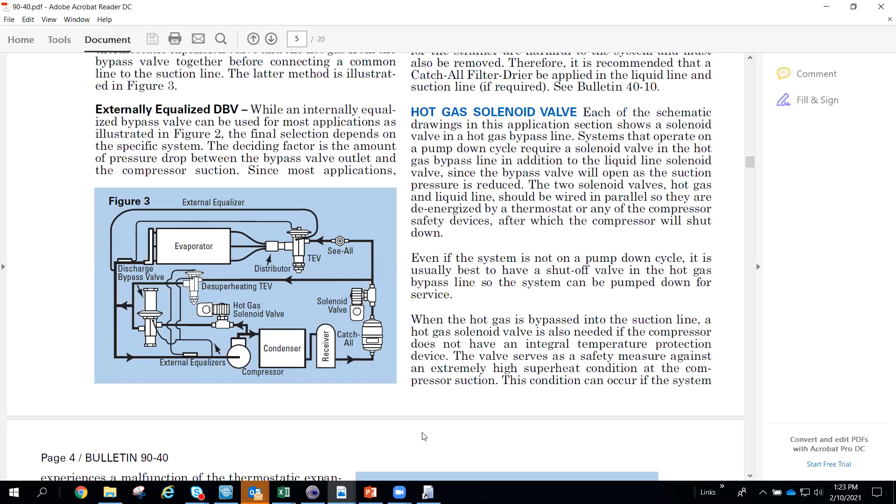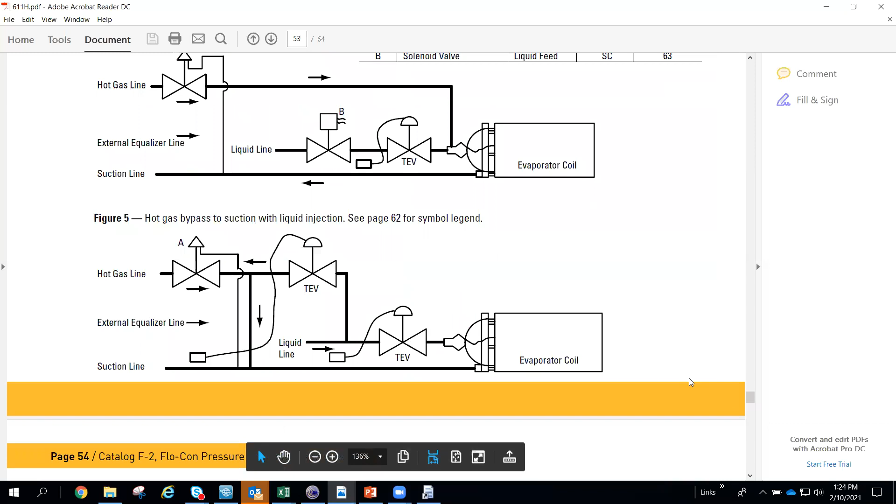So those are the three applications. You can get two of the three diagrams in one bulletin, or the third application shown here in bulletin 90-40. Any questions about that?

I'll add, those would be Sporlan expansion valves with special desuperheating charges we've talked about, typically an L1 or an L2 thermostatic charge. That's a Q-bench part, hopefully.

Trying to see what else is pertinent to talk about here. Crankcase pressure regulating valves, again, those are just outlet regulating valves used in the suction line to limit the compressor inlet pressure.

At my former job, I used to work at a chiller manufacturer called Thermalcare. We used to build a lot of chillers for higher temperature applications like laser and optics cooling, typically running an evap temperature of around 70 to 80 degrees. Running that, the suction pressure was way too high to go into the compressor, it would overload it. So on most of our chillers we'd have crankcase pressure regulating valves built into the suction line to limit the pressure going into the compressor.

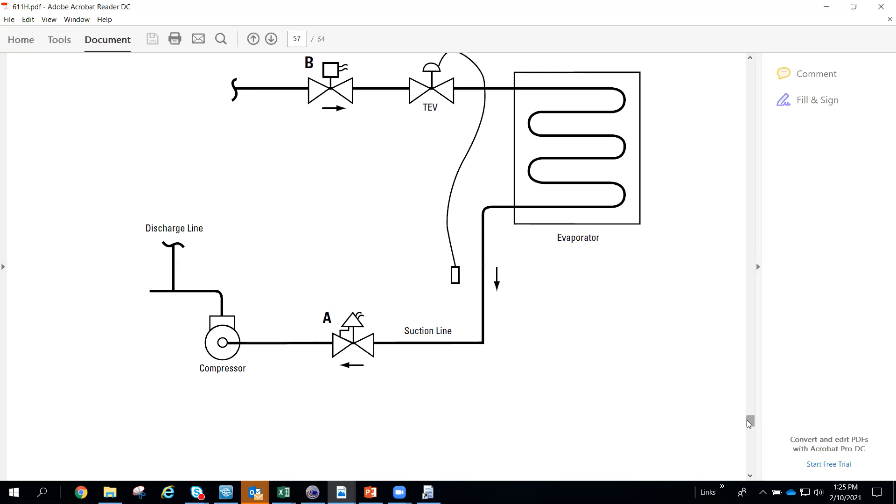So you can use the outlet regulating Flo-Con valves for that application as well.

And then you've got your suction solenoid valves, with their own nomenclature. Your SCs have two different body sizes, just like the (S)PORT valves. The port size and connection sizes are listed in number of eighths of an inch, not in fractions. And the SC2s are the aluminum bronze bodied ones also.

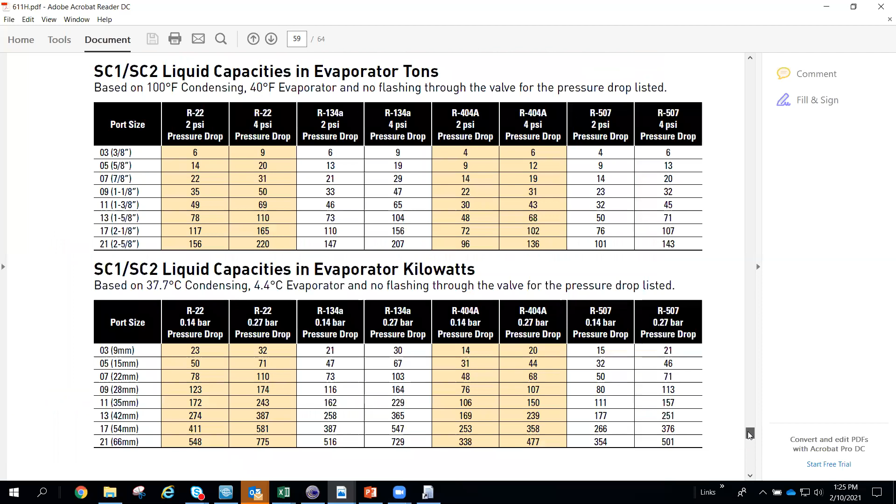Then there are the capacity tables, a bunch of abbreviations down at the bottom, and some quick reference stuff here.

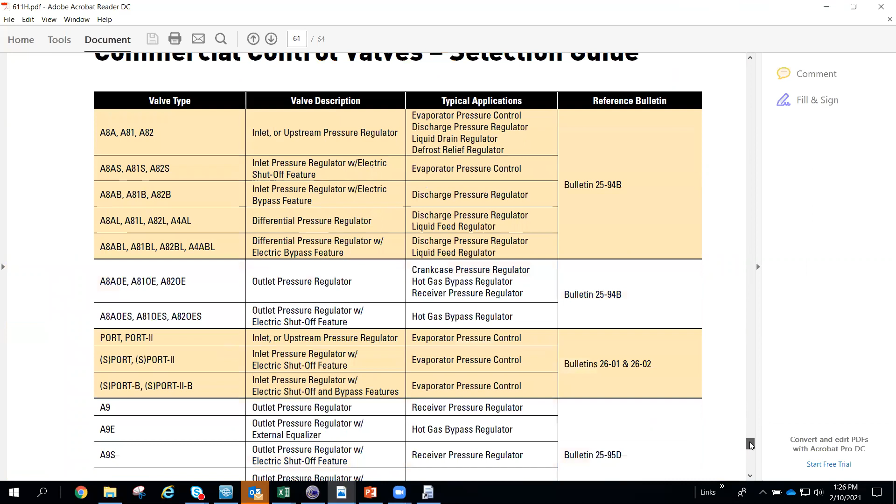We have separate bulletins. If you need a bulletin specifically for the A8As, we have one geared towards that, or for the (S)PORT valves, we have one geared specifically towards those. I typically just use the 611H, but if you need something that specifically focuses on the sports, we've got a sport bulletin, I think 6 or 8 pages, that focuses on that. But all of those are listed in here.

That's about all for the 611H. This is one of the documents I'm pushing for our advertising team to update with new refrigerants. There really haven't been any changes. The only new valve added since this was last updated was...

We used to not have an A8 two-bodied outlet regulating valve because we typically never saw the need for somebody having that much hot gas bypass or that much receiver pressurization, until we started dealing with a company out in Asia that builds really, really big ice machines. They needed a very big outlet regulating harvest valve for their ice machines, so we started building the A8 two bodies with outlet regulators. That's really the only product added to the Flo-Con product family since this was last updated, that and obviously updating the refrigerants as well.

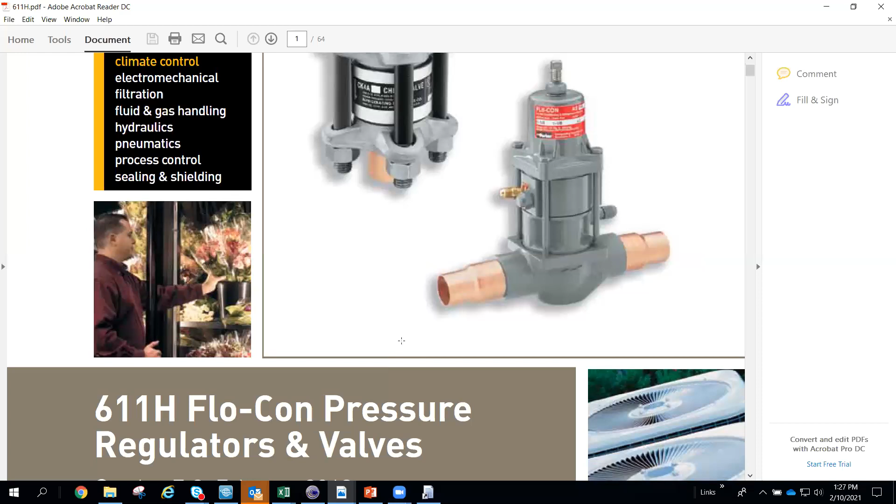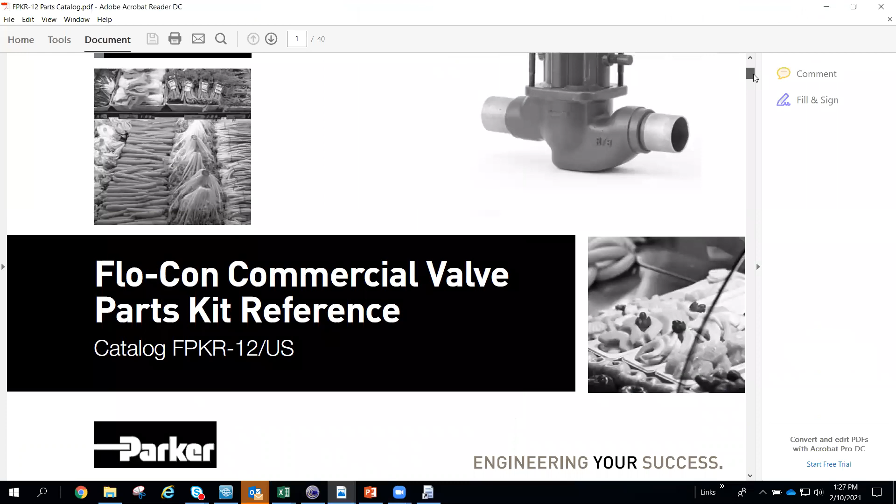So that's that. And then the parts kit bulletin, which I was really happy when they came out with this, probably 8 years ago, maybe. When was this printed? 2012. Before that, it was a little more tedious to find the parts for each valve.

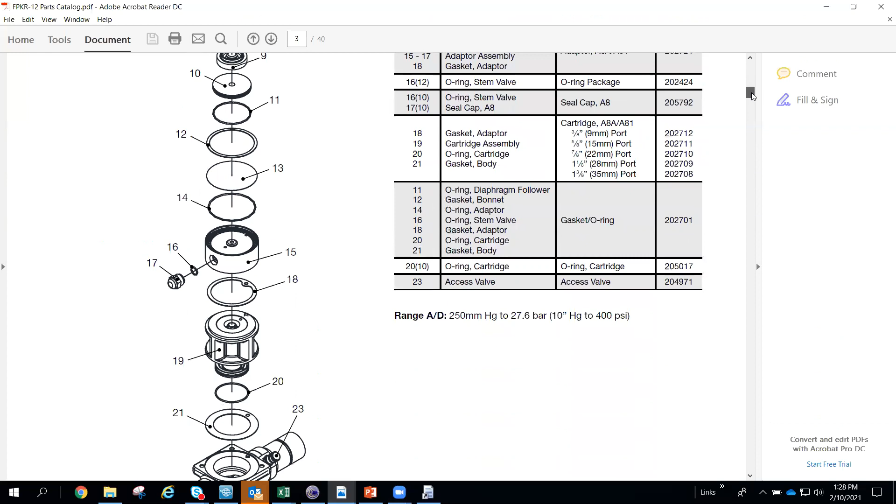But I think this is a pretty nice bulletin where it basically goes through all the major product variations, like an A8A or an A81 inlet regulator, and breaks it down by each part, with a full blown-out picture of the entire valve by part, with the part description, the kit description, the kit number, everything. It goes through all the different combinations of valves, the A81 inlet regulators, the A82 regulators, inlet, with the electric shutoff features. So this is a very good resource.

And this is one of the other ones I want them to update as well. It's pretty much updated, but there's some things that still need to be tweaked. There's some part numbers we've changed.

Since we combined Sporlan and RS together into one division, we came to find out that there were part numbers that we both used. So Sporlan had a number, say, that was a filter dryer, and Parker RS had the same number that might have been a diaphragm kit. So we've had to figure out how to manage that. Sporlan being the bigger of the two divisions, Sporlan overrode the RS, and so RS was forced to change some of their part numbers. So there are some part numbers that we've more recently changed just because of overlap with Sporlan.

So that's really the main thing that would need to be updated in this parts kit bulletin. But if you call in and talk to customer service and give them a kit number that might have changed, they'll know what the new part number is.

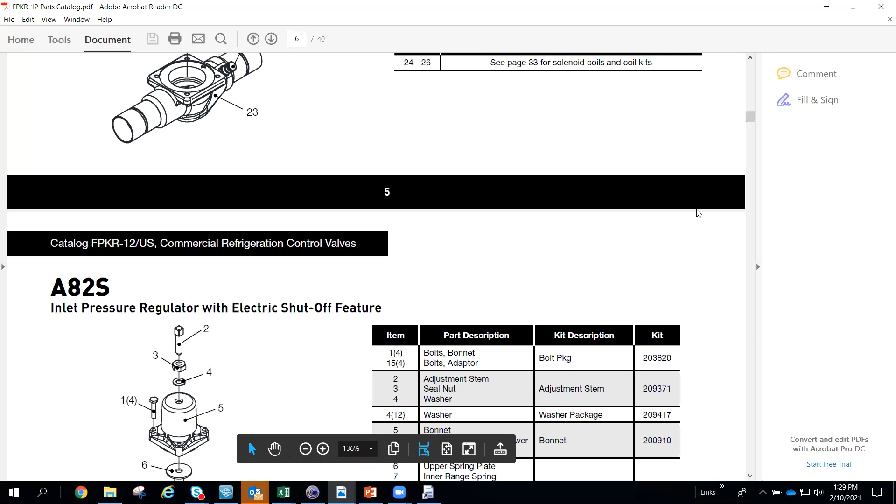Other than that, this parts kit is basically just, for each valve, all the pages showing the different valve variations with all the parts kits and all the specific individual parts that can be individually sold. So it's a very good resource if you need to look up a specific valve that a customer has and what parts they need.

So, any questions about the parts kit at all? No, just a comment, Eric.

Just so you guys remember, I also sent out 4 attachments, which are the worksheets that have a minimized common parts list selection for each of the valve types, that actually Garth Dennison and I worked on when I started with RSL back in 2008. Garth Dennison did a lot of great work on that back at that point.

And then Jeff, did you send out the CLP 21s to everybody, or does your purchasing team only have that, or does everybody have access to the list prices? You're talking about the pricing sheets? Yes. That just went to purchasing. Okay, all right, yeah, then I won't go over that. I'll assume purchasing will handle pricing then.

So, but yeah, if you have any questions, Jeff and I can resend it to you if you don't have it readily available, but the contact information for Parker RS: 708-681-6300 is the main phone number for the Broadview facility. That's where you can get a hold of customer service or get a hold of the application team.

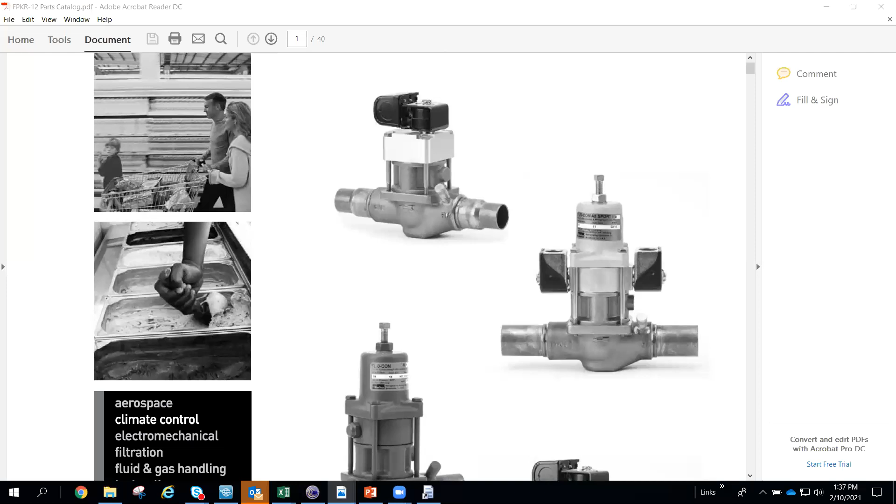And with that, Eric, I think we're good, and that's been absolutely fantastic. All right, good deal. And yeah, once I get the file, we can figure out how to get that via Dropbox sent over to you. That's absolutely fantastic, much appreciated, sir.

Yeah, absolutely. And hopefully, once this pandemic's over, I can travel up to Canada and meet with everybody, and we can do some further training as well. But yeah, feel free to lean on Mike and myself for any support you may need. Not a problem, we will.

And if you could just resend me the email with the contact information, in particular for Jeff and Juanita for technical support, that'd be fantastic, because Joan is really key towards the order entry aspect, not really supporting on the product side. So I want to make sure the inquiries are going in the right direction.

Yeah, that's a good point. So Joan is extremely knowledgeable, both on order entry side as well as product side. But she typically does not field application issues or technical questions just because she's too overwhelmed with the customer service side of it. So I would direct that to Jeff or Juanita, or on the sales side, Mike or myself.

But yep, I will send that over to you. Fantastic, thank you. All right. Well, thanks everybody for your time today, and I'll talk to everybody soon. Okay, thanks everyone. Thanks, all right. Take care. Thanks for being here, Mike.